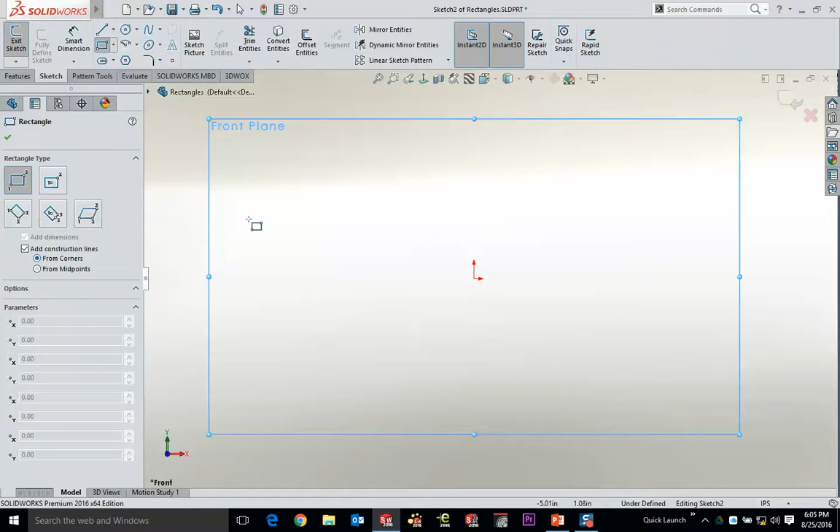Now, I don't have a lot of use for drawing these from the corners, because there's already an entity at that endpoint—these show you a nice center, but that's about all they give you. When you use them from the midpoints, it gives you the center point, but it also gives you something you can latch onto. There's a little center point you can grab and drag, move this thing around, and it's just an easier thing to deal with as a result of that functionality.

We'll start to show that a little bit later as we go, but no matter what type of rectangle you draw, you can use those functionalities. So even if it's more of a parallelogram or something on an odd angle, you can click and insert those, and it will add those particular pieces of construction geometry. Be aware that those are available with any type—by turning those off, you just get a basic rectangle in any orientation.

Now, the center points lost a little bit of their need with SolidWorks 2016, because you started to be able to actually grab midpoints directly. If I want to pick a midpoint, I can just pick on it. But I can't quite move it around the same way I was moving around an actual physical point that's there—picking on that doesn't allow me to drag it around that specifically.

The other types of tools I really like to talk about are things like slot tools. Slots were added a few releases back to really improve the productivity of creating what is essentially two lines and two arcs—either parallel lines and tangent arcs, or a radial type, an arced slot. That's now a couple of concentric arcs capped off by a couple of tangent circles, or arcs.

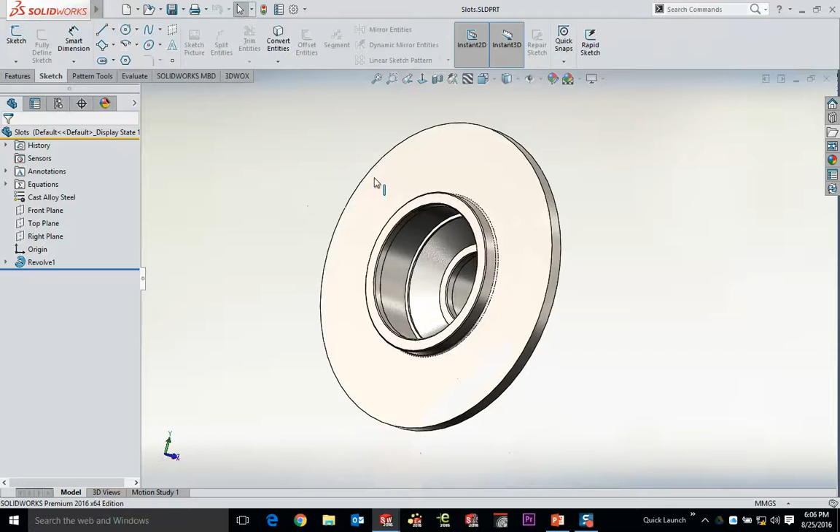This is a really simple tool to be able to utilize. When you go ahead and select on a face and start a sketch, there's nothing mystical to that.

By grabbing on either of these slot tools, you can do either straight or arced types of slots. It's either a center point to center point start, or a midpoint of the slot to a center point, which is the one I'll do for starters here.

When we're looking at a slot like this, if you start at the midpoint and then go off to the side, you can snap this horizontal and vertical. Once you click that into place and pull, that creates the rest of the slot for you. It's a simple thing to do, and it will auto dimension if you have the add dimension check mark turned on over here.

By doing this, you can also choose to have dimensions either go from center to center or to the maximums, the tangencies that are there. This is a retroactive thing. If I set it to be the maximums and draw another one over here, that's the setting I currently have turned on, so you'll see that come into play on this initial creation. But even if I exit this tool and select that slot, I have the ability to retroactively change that dimension. It's a nifty way to do each of those.

The arc slots, though, are just as cool. It's either a 3-point arc or a center point arc, so like you're drawing a circle or a 3-point arc, only you get the benefit of the slot after the fact.

By starting with the center point arc, I'll just start at the middle, begin by clicking the first point of the arc, second point of the arc, and then from there you're just pulling out and getting this really beautiful slot that gets created there. This gives us an angle dimension, a width dimension, and then in this case the radius itself.

When I go ahead and take these and extrude them as a cut, I don't really care how far they go, so we'll just pull them all the way through. You end up getting additional geometry that you didn't get when you drew two lines and two arcs tangent to each other.

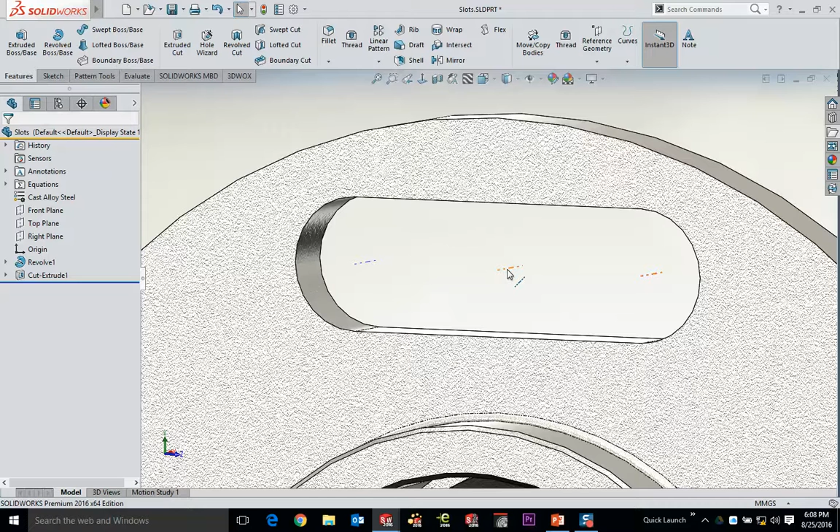If you go ahead and show these things called a temporary axis, what you'd get here is actually a temporary axis in the center of both circles, but also one right in the center of the arc. The key to that was, before we could do a slot mate, you had to have something to mate a pin or some fastener to in the middle of the arc, and that temporary axis really was the magic to that.

It even happens down here on the radius one. It's a very tiny looking temporary axis, but it is right in the middle of that slot, so that's a suitable thing to be able to mate things to.

The spline tools that I like to show, though, these are the ones that really allow us to create some very odd geometry. There's 2D reasons for this, and then 3D reasons for the spline, which are going to be more like wires and hoses and things like that.

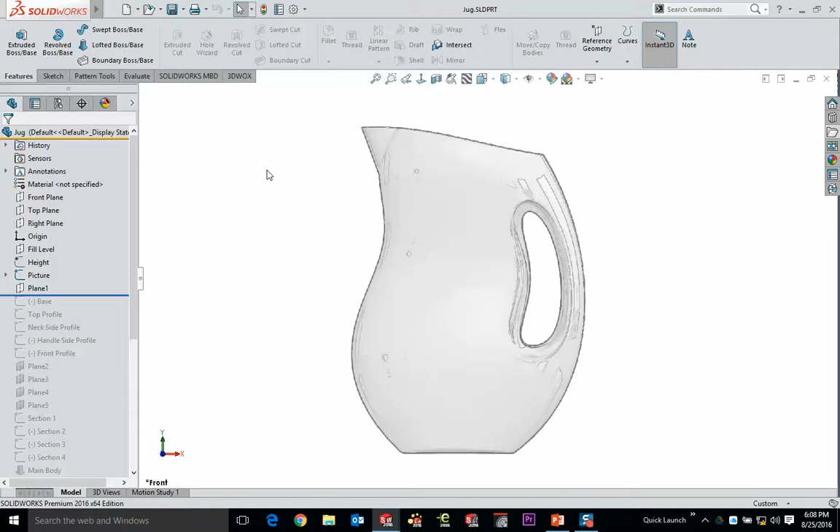When I'm drawing a spline, though, we've added recently a new spline type called a style spline, and that's really my favorite one here. Now this is an image that we've imported. I'm going to show you how to do that in just a second.

But when the image is of poor quality, I have to manually trace these edges. We do have an auto trace functionality, but on JPEGs you might as well give up on it because they have artifacts around the edge due to their nature. So typically what I'll do in this situation is just create a sketch.

With that sketch, I'll draw a spline. If I want to map an edge, like this really curvy edge in the front here, you can use the traditional spline, but I've gone away from that since SOLIDWORKS 2014. This regular spline is a bunch of points that you'd click, and then the spline itself would interpolate through each of those. The quality of this spline, though, is not very good.

It's more like an Adobe Illustrator spline, for anybody who's done vector graphics in that respect, where you have all these points that you can then change the weighting through, as well as the angle of attack.

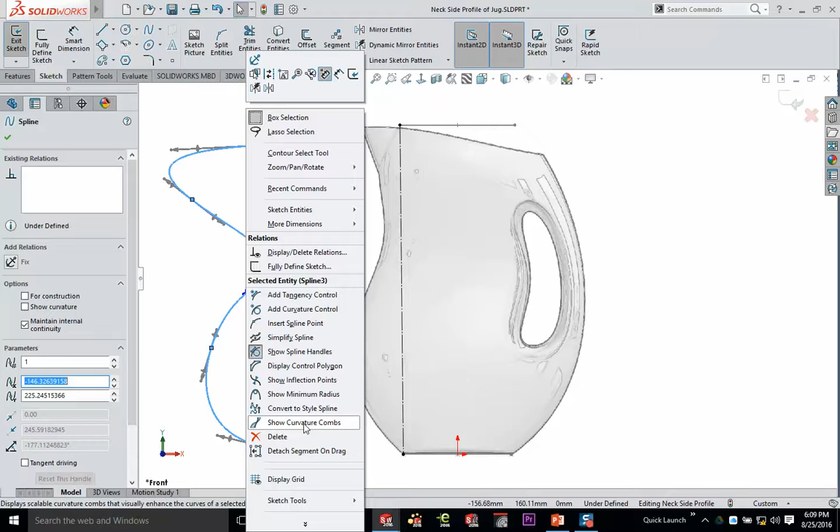It can be independent on both sides, and it can also have a really big detriment to the quality of the curve. When you right-click on any spline, you have an option to show curvature combs, which is an interrogation tool that shows you how a curve turns from convex to concave, and how quickly these inflections take place. When you get funky, drastic changes adjacent to each other, that's really bad for the quality of the curve.

So what we've added is something called the style spline, which from a user experience is a much easier thing to create. It's based on a bunch of construction lines, and the spline itself is weighted by the points that are on the construction line.

Also in 2016, we added the capability to make this a B-spline, which is a really smooth curve. No matter how sharp it turns, it keeps the curvature very consistent and smooth. You can look up on Wikipedia the difference between Bezier and B-spline, but essentially it's a higher order of curvature while still keeping it tremendously smooth.

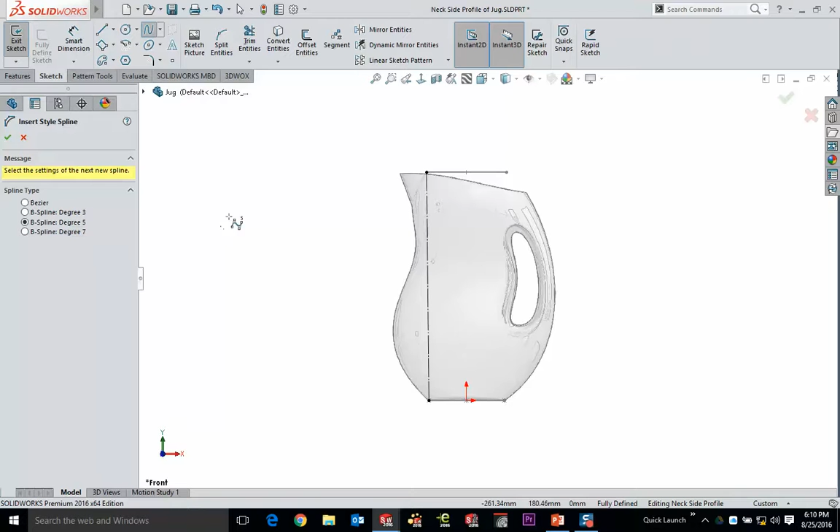So when I create something here using the style spline, what I end up with is a bunch of clicks that are basic linear inputs. As I'm clicking here, I'm drawing construction geometry, and we're getting a curve that follows what I'm doing. I have some capabilities to change this through pick and pull, but the curve itself is driven by where these points are, so it stays nice and consistent without sharp inflections from grabbing a point and twisting it in a weird direction.

It's just a matter of a little trial and error, which after doing this a bit doesn't take long, and you can easily map that curvature to something that looks really nice. When we right-click on that spline and show the curvature combs, we get combs that are very consistent side to side, changing from start to finish, but a pretty smooth mix throughout this feature. So that gives us some really nice geometry.

Now another little side benefit here - I didn't explain this up front, but as a little demo magic, what we had going on here is a surface that's actually a swept surface. Initially I had it created going between a spline and some non-existent geometry over here, because this sketch was actually just a center line. We have a function we added a while back that allows us to replace one entity with another.

So if I drew a garbage spline and used that for a sweep path, I could go in and edit that spline, draw another one that was completely clean, and swap one out for the other so that all downstream relationships would update to the new sketched entity, even though the old one was essentially replaced and deleted. It's called replace entity.

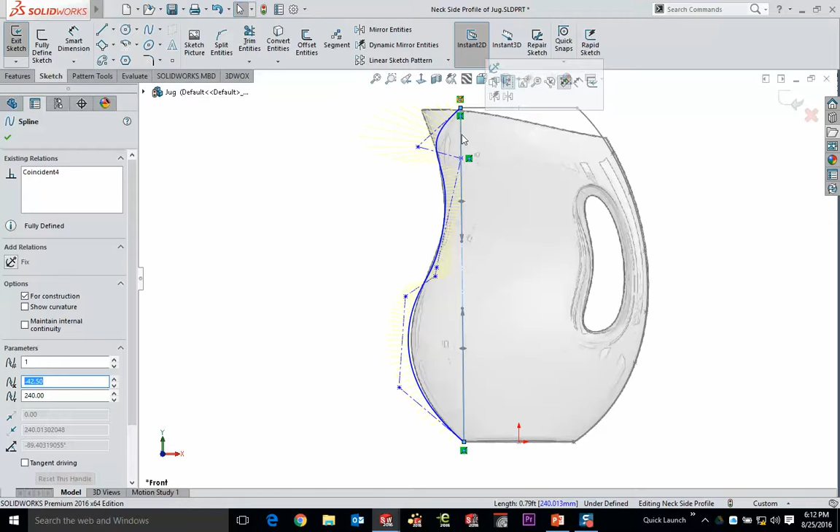So in the initial surface I've got here, this line was the left-hand rail of that surface. I'm going to swap it out for this spline I've just drawn, by selecting the line and using the Replace Entity button. So though that was the sketch profile in a sweep, I'm now going to replace it with this spline, and delete the original - which could also be left by making it construction - but I'm essentially replacing it with this new splined entity.

So when I do that, it now updates all downstream references to this new spline. As I start to rebuild and go through my tree, I'll get a full surface that updates to that new spline as opposed to the old line that was there.

A little hard to explain here, but we added that in 2014, because if you did those types of swap-outs, there were a lot of references and broken features downstream in the tree, looking for the old sketch entity that was deleted and replaced for a good enough purpose. But in this case, replace entity allows us to swap it out and everything updates fluidly after that.

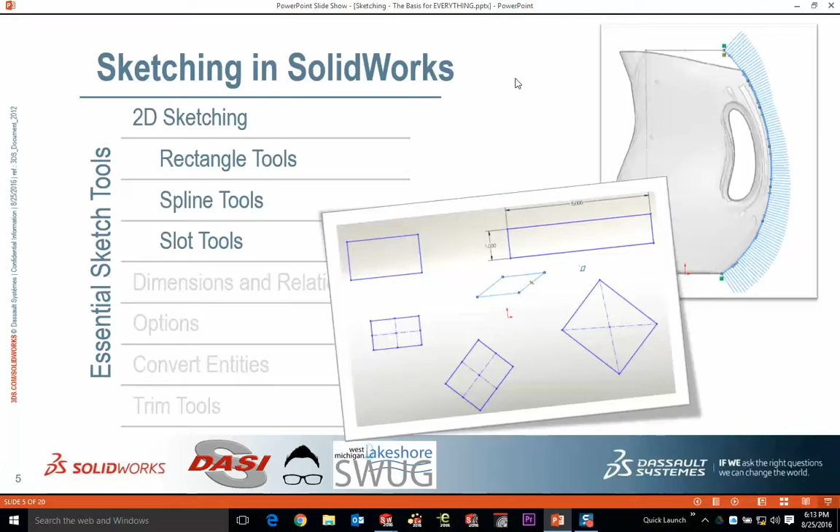All right, we'll start getting into some really cool stuff here shortly. So dimensions and relations is really how you can take your sketches - and this is the minutia.

You have to put dimensions on everything. You can work with underdefined geometry, of course, but proper practice would be to fully define your sketches so that the updates are predictable.

But what I want to do is show a couple of things with dimensioning—basic workflow, dimensioning the center lines, and even dimensioning to a couple of circles or individual circles on screen, and how those things behave. So let me start out first with this circle here.

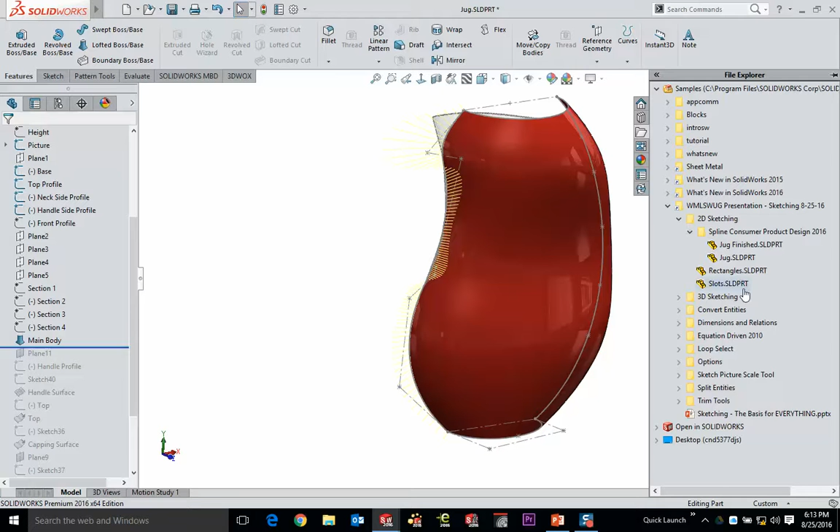Couple of things here that I want to show. All right, so I'm going to start off with this body right here. And what we've got is a sketch that's got a lot of blue underdefined geometry.

One of my favorite things to do whenever I set up a new computer with SolidWorks is add a hotkey, and that hotkey is Alt-S. When I click on Alt-S, that's my relationship hide and show.

If you don't use a hotkey for relationship hide and show, you're either fighting through this complicated looking sketch—because as you zoom and pan you've got all these relationship icons to deal with—or you're constantly going up to the hide show tools, and I don't even know which button it is up here since I never bother using it. Hide and show relations is going to be... good Lord, that's points. See, I don't even use that.

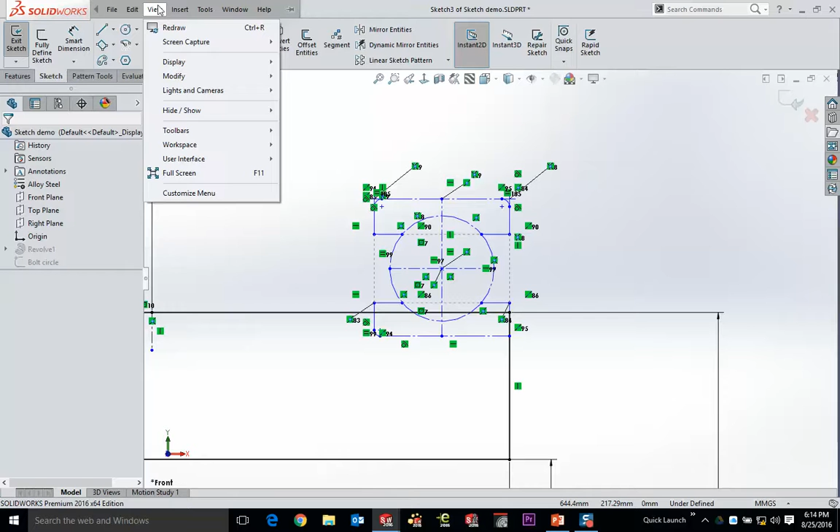Use the hotkey—so I'm showing them right now. Basically, if you go to your View pulldown menu, that's where you're going to get your hide/show modifier. Alt-S is what I use for that. It's quick enough to use because I like them, but only a very small amount of the time, because they do clutter your display. So Alt-S will get rid of that for just a second.

I want to show some of the things that were added a while ago that can kind of be swept under the rug if you're not looking at those.

It's Alt-S for me, but I created that hotkey. So what you want to do is go to Tools and Customize, hit the Keyboard tab, find Sketch Relations, and just assign Alt-S—or make it whatever you'd like.

If you have a 3D mouse, using one of the buttons on your 3D mouse is also effective if it's a constant function that you do.

I want to illustrate a couple of things that have happened somewhat recently here—this is 2014 stuff. But I'm going to delete some entities to do this. One of the things that happened was the ability to rapidly add relationships without an excessive amount of picks.

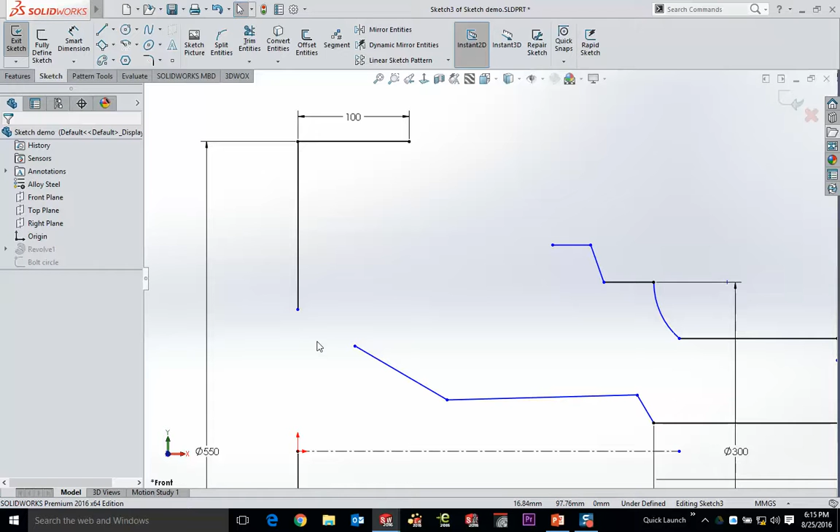I'm going to use a tangent arc right now to cover up this area where I just deleted a couple of lines. When you draw a tangent arc off the end of a line, it's going to be tangent from that point. Now this is gesture based, so if I pull this to the left or to the right, of course that tangency will work.

But if I go back to that endpoint and pull it out this direction, it's still technically a tangency, but it's a tangency perpendicular to that vertex. Or if I go back and push it back this direction, you see the tangency go that way. This is all just how I'm moving my mouse to get this to happen.

Of course, the second end of this is all predicated on where the other entity sits. So as you end a sketch at a point, what you're now served up with is immediate relationships—this is what's possible between what I just drew and what I drew it to. And when I click on tangent, it simply goes right to it.

Now, when I draw a line, it's the same kind of thing. If I draw a line from the middle of space to the endpoint of an existing line, that's going to give me the properties for that line, but also properties like perpendicular and parallel for the entity I drew to. So I can immediately go to perpendicular on something like that.

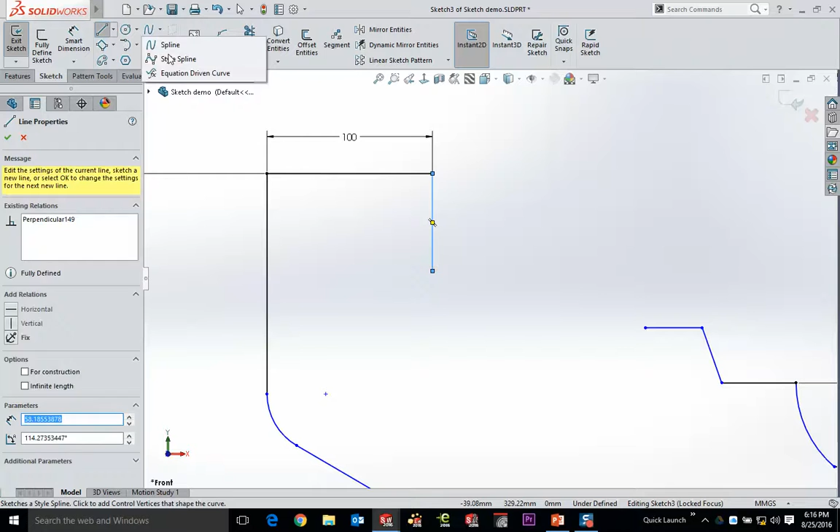Now it even works for splines—this type of stuff is pretty typical. So if I draw it from here to here and then end the spline down here at the line, same kind of thing. Only splines don't give you just tangency, they also give you curvature continuity. So I could do this as a Class A blend between those entities, and that's going to work out nicely there as well.

Now this works even retroactively. So things that are already drawn, like right there where we don't have a perpendicularity, if I pick the endpoint between the two, we get the relationships appropriate for those two entities. You used to have to pick both lines to get this to happen. Now you just pick where they touch. Down here it's the same thing. You pick that point and I can choose tangency between the pre-existing line and arc, and it adds those relationships easily. That's something that's been around for a little while.

Dimensioning also walks you through the process depending on how you dimension. A while back, probably 10 years now, when you dimension to a center line in a sketch having a construction line like a center line, there's this thought that it's most likely going to be an axis of revolution. It's not always, but most likely that's the case. So when you dimension from any entity to a center line, we've always had this behavior where we'll give you the linear dimension, but instead of placing that text, if I move my cursor below that center line, it automatically doubles that dimension so that value is proper once you make the 3D solid.

We did this because in design tables, people would have to deal with a half-size dimension for a full-size part if they're trying to automatically update a dimension on a part with a table. And we don't like that visual. So full-size dimension is important.

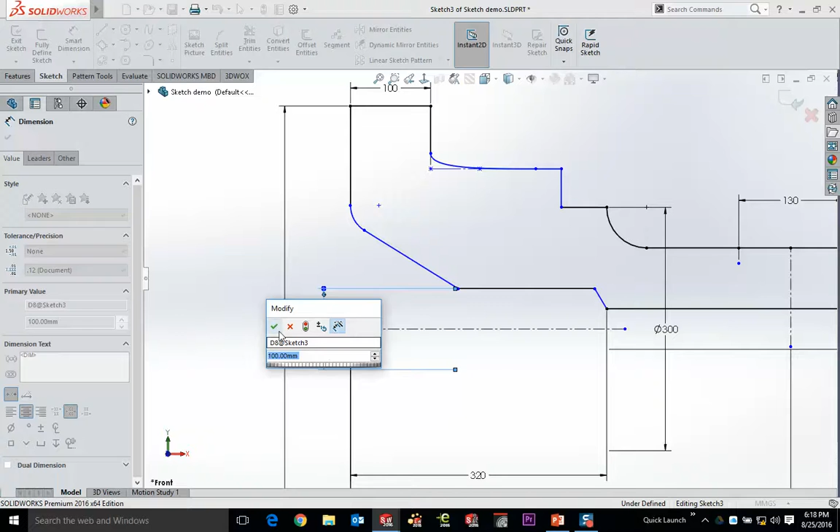Now once I add this first dimension as a diameter, my cursor makes it a persistent function. There's a little center line with a D next to it, and that essentially means that center line is now an understood selection. So even if I was up here where I couldn't even see the center line, I could dimension to another entity like a line, and it would automatically pick that center line and give me the double value, as you can see as I zoom out. It's going to keep that going until I decide that's no longer the case.

So I can do it here again, put another dimension in. Everything else I have is pretty much fully defined unless I go to a point. So let me just go ahead and click to a point, and you can see that happen there as well.

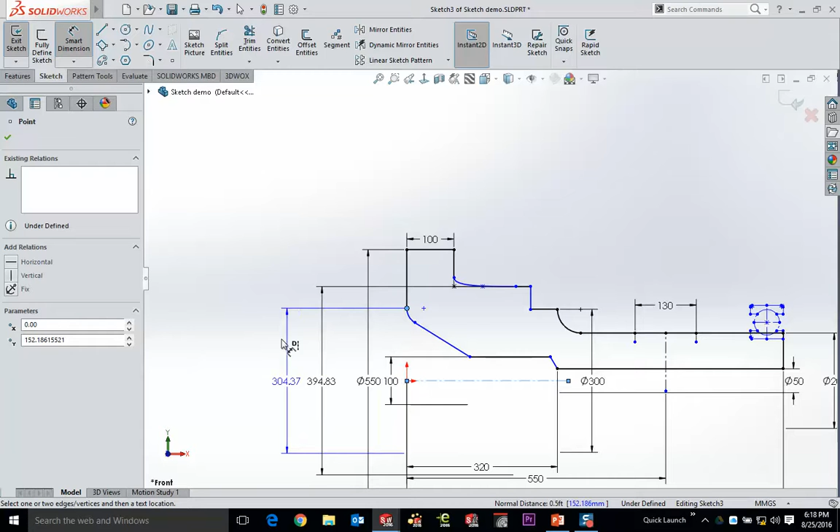Now the beauty of this is that it helps you until you don't need it anymore. So if I really don't want to deal with that, maybe I come in here and select this line, which will give me a double dimension. If I immediately go to something else, like maybe this point, what I'm going to get now is a dimension that just goes between those entities. So it will persistently pick the center line until you choose to pick something else, and then it'll let go of the center line and go discretely to what you've selected. It's got a neat behavior that way.

We added, with this release, the ability to do that also on an angled line. So if I now pick on a line that's on an angle, I've gone past that function, so I'm back to regular dimensioning. If I now go ahead and pick a center line here, we don't quite get that same doubling behavior. The problem is that when lines are parallel to each other, they never converge. But when lines are on an angle, there's no one side or the other - they will eventually cross, and then it will flip directions. Sorry about the hand puppets, the video's not going to get that.

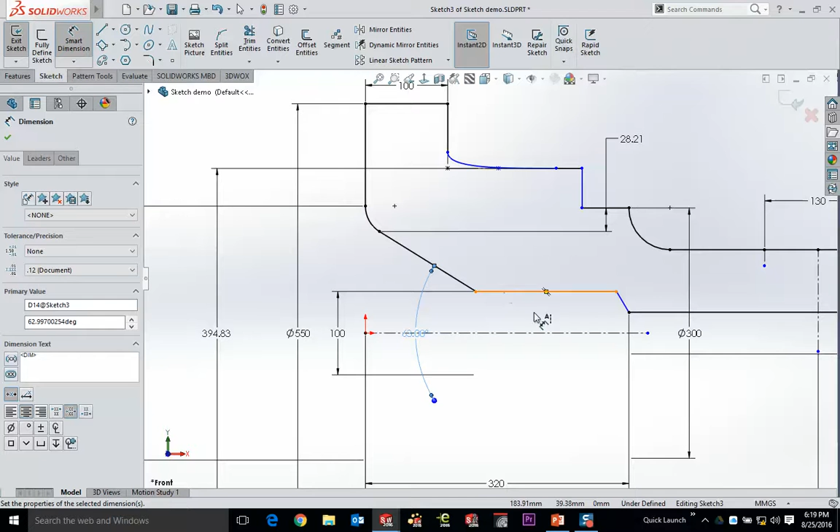However, if you want to double this dimension, you hold the shift key, and that will double that value. So it'll work on an angle and give you the full value, but the shift key is required to make that happen. Now if I click that and put that in, I get that same cursor behavior, only it shows an A next to it because we're talking an angle, not a diameter. So here, if I pick on another line on an angle, it's going to persistently select that center line. We still need the shift to give us that doubling value, though. It's just a quick way to get those dimensions in place and selected and located properly.

So keep an eye on that. If I pick something else, right now, again, it's showing on an angle. If I pick on anything, it's going to give me a 90-degree angle.

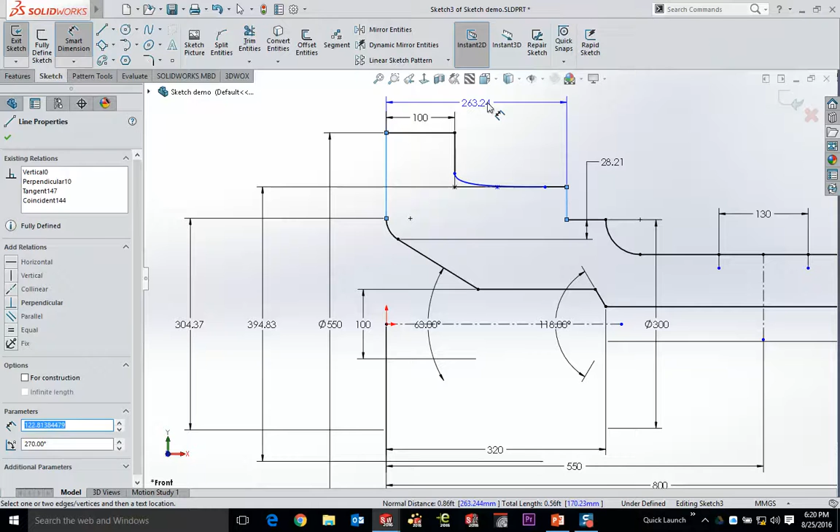If I just want to pick on something else, it will let go of that center line and then default to what I've actually selected. So that's the way those things function.

Now, I like to bring up one here quite often. It's one of my favorite things to show, and that is dimensioning to a circle. Circles are one of those things where when you dimension to a circle, you want to pick the circle. A lot of people come from 2D AutoCAD and like to pick points. In fact, when you draw a dimension on a line, you have to dimension from end point to end point, which I always thought was ridiculous. Just pick the line and let the software pick the end points. But when it comes to circles, circles have a whole different behavior.

If I start picking center point to center point, what I'm getting is actual center point to center point values, and as far as the software is concerned, that's just a line, just points. What happens is you look at the properties for this dimension and you really just have basic linear dimension properties. I'm going to show you what I'm talking about with this other tab in a second. When you dimension instead to a circle, let me delete that dimension and go from one circle to another,

it's always going to default to the center point of that circle. It's always how we've done it. However, what you get when you dimension from a circle to a circle is under the other tab, the leaders tab, down at the bottom, you get this thing called arc condition. By picking on the circle, you can now go from center to center, defaulting to maybe the minimums to each other, or the minimum to the maximum on another. It's a tangency thing that takes place. Unless you dimension to a circle, you don't get circle or arc conditions. So it just makes sense there.

Now with something like this, you can actually do that with the dimension when you're applying the dimension itself. I've drawn these two pieces of construction geometry because this basically happens within a 90-degree window, 45 degrees on both sides of the center line to center line of this part.

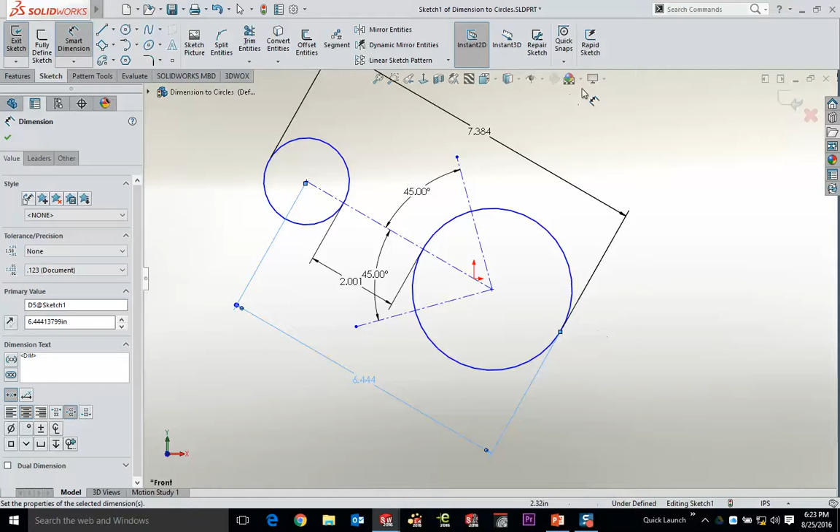But it's this magic little window that happens, 90 degrees here, then 90 degrees here, then 90 degrees on the back side, and you'll get those different nuances. So that one there I think is worth showing any chance that I get to. So any questions so far, guys?

All right, got to keep you awake. When you have pulled pork like that, you tend to doze off very quickly, and I didn't eat, so that's why I'm going to keep going here.

There's a couple of options that I like to deal with on sketching, and these are going to be global system options, not document specific. So it will be the way your system works every single time we do this. Let me jump right into each of these.

When you go to Tools and Options, or the little gear icon at the top, there's a specific group of settings just for 2D sketching. When I pull this up, there are default settings and then there are my favorite settings. Unless you're using an options file, I like to set these discreetly because I like to see if they've changed. But there's a couple I like to show people just for your own sake.

Solid Edge users, you're used to pick a face, start a sketch, and it will roll normal to you. That's this first setting right here. We haven't had it for very long, maybe 4 years. It's called Auto Rotate View Normal to Sketch Plane when a sketch is created. When you turn something like that on, no matter what orientation you're looking at something—

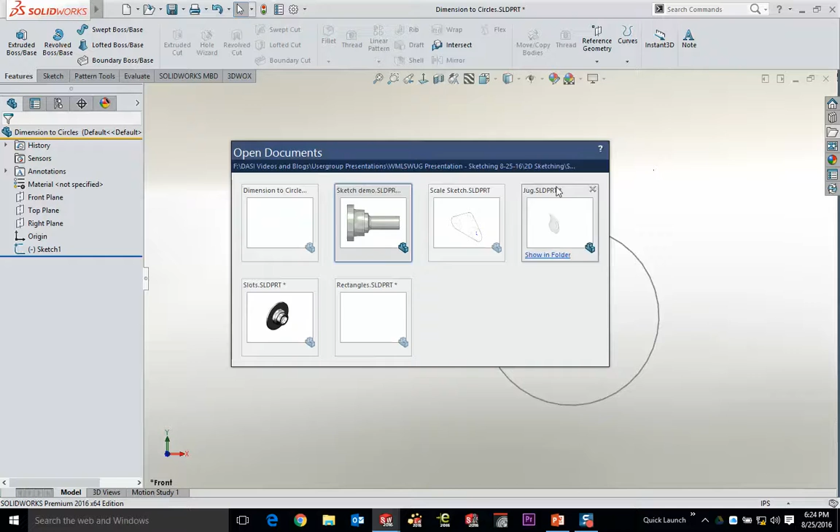Let's take this part for example. If I pick this face and start a new sketch, boom, it comes right to my orientation. Then I draw a circle, and hit extrude. Now it will jump back to the orientation I started in, and then I can do whatever I want. So if you like to work in plan view, it will go between 3D to plan view and then back to your 3D view when you're ready to do the 3D operation. But it's all based on that one setting.

Tools and Options, Document Properties, Tools, Options, System Options, and then down to Sketch. It's the first one: Auto Rotate View Normal to Sketch Plane on Sketch Creation.

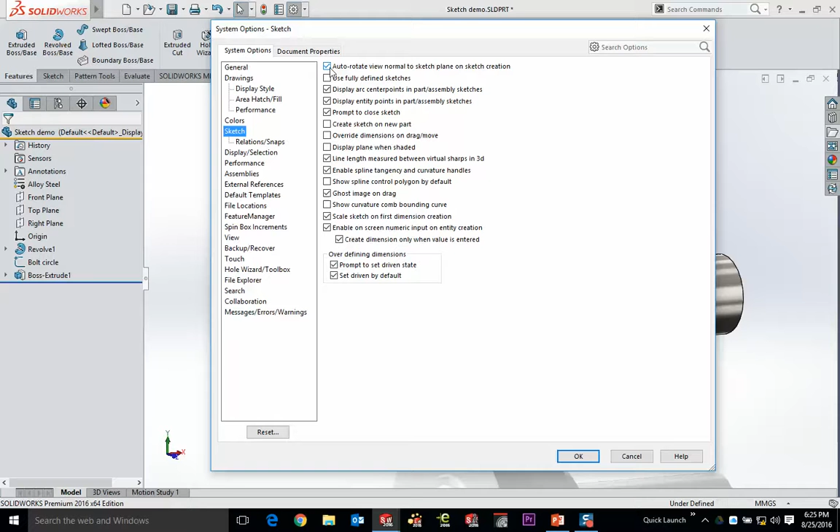Think about that—I wish it had... that's good, what you just did there. When you go back and edit your profile, does it come back up? No, it doesn't. So it's not upon edit.

So here we are looking at this one. If I pick it now and say Edit Sketch, it does not come back up—it's only on sketch creation. I think that's the terminology that was picked very specifically. Sometimes when you have limitations, as long as you describe it, you set the expectations. But that's not a bad idea.

I would like maybe a sub option that says also do this when you edit. Not a bad idea. I don't have a notepad here, otherwise I'd take note of that. I'll try and put one of those in. Enhancement requests are the lifeblood of the software, by the way, and it's little comments like that that get that stuff put into the software. So those are good things to know.

Down here is another one that I get a lot of reaction to, and that's Enable On-Screen Numeric Input on Entity Creation. This has been around for a while, but the one beneath it really is the one that made this usable, called Create a Dimension Only When a Value is Entered. Typically they are turned off by default. So if you go ahead and turn this on, I'm going to show you first the behavior of Enable On-Screen Numeric Input on Entity Creation.

That's how I'm going to set this. I'm going to pull up a different part here, just so I'm keeping things consistent with what I've prepared—not that bearing. What do I want to do on that one? There's another file I want to use for that, but I can go ahead and use any one of these different individual ones, no big deal.

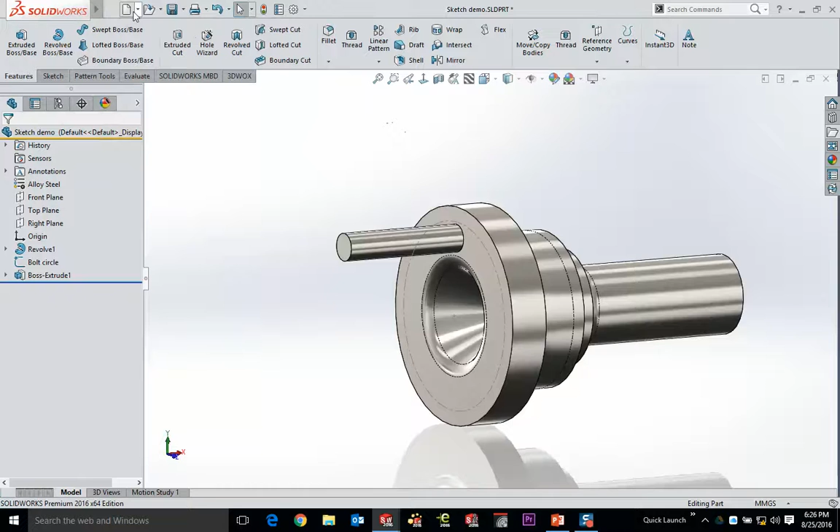When you draw something, we want to avoid the dance of drawing your sketch, then dimensioning your sketch, and make it a bit more of a quicker process by allowing you to add dimensions while you sketch. The setting I have turned on is Add Dimension. When you draw a line, you'll also see over here on the side some add dimension operations. Now with those turned on, as I draw this line, you'll see my preview—as I click, it's adding dimensions, every single time I put that in.

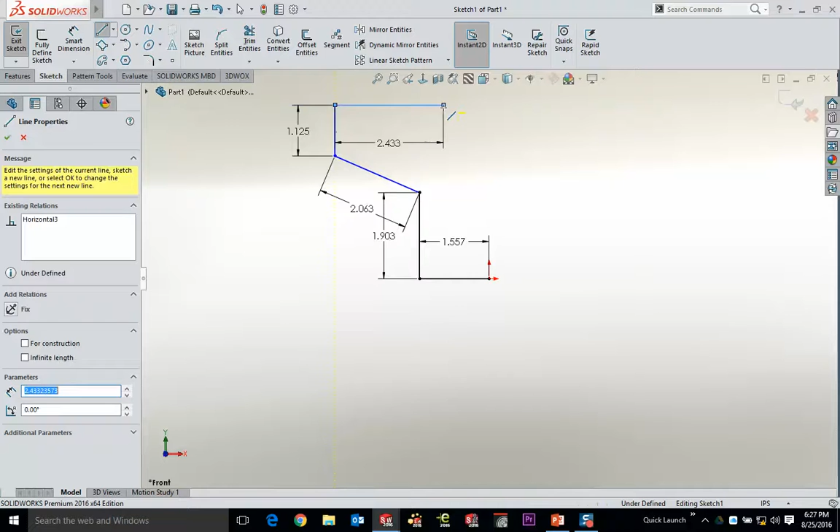Now this was the initial creation of this tool—I think it was around 2012.

What we found out is that people spent more time deleting the dimensions they didn't want than getting the benefit of the added dimensions automatically. So that's where things really got ugly with this one.

Now the next setting is what made this palatable. Again, go to Tools and Options, System Options, down to Sketch. That's Enable On-Screen Numeric Input for Entity Creation, but also Create a Dimension only when a value is entered. So this is what this looks like.

When I'm drawing a line now, I'm doing the click, click, click method. The AutoCAD method is how I refer to this, because Windows is more pick and drag, so pick, drag, release. I'm just going to click and release and move my mouse.

Now what happens here is you see a preview. If I type in a number now, it's going to add that value and continue sketching. I can type in another one here. Let's make that one 3, and then I'm going to continue in this direction.

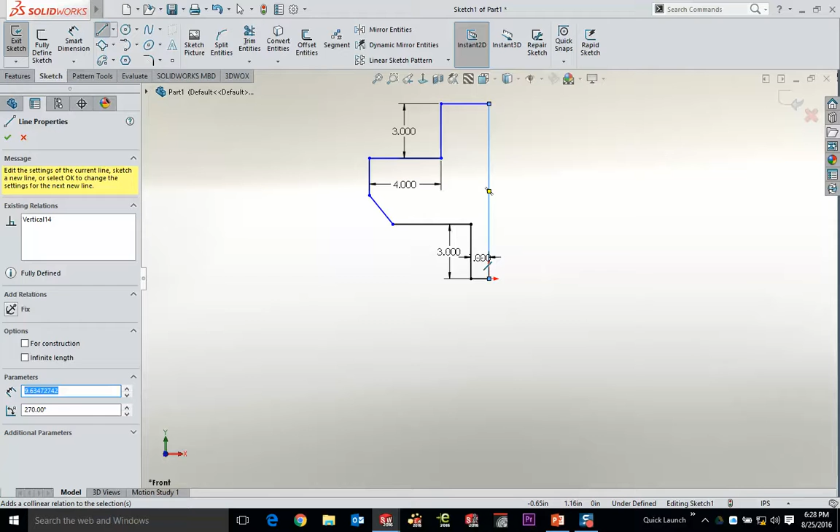Now if I click and don't add a dimension, it doesn't add one. So maybe you don't know a couple of these dimensions, and that's okay. But when you do know a dimension, go ahead and add it, and it will add that value for you. So maybe you know some of these, maybe you don't. It gives you the flexibility to type in a number when you know it, and not type in a number when you don't.

Now, one of the reasons I'd show something like this is especially when I draw circles. Circles are the ones that make this the most pleasant. If I want to draw this bolt hole circle that you're seeing over here, I'm going to draw that bolt hole circle.

What I'm going to do is pick the face, start the sketch - I did turn that setting on - and take my circle tool, and without doing a pick and drag, I'm just going to click and move my cursor. You see the preview, I'm about 375 millimeters on this one. If I type 400 right now, it will add the dimension, fully define the sketch entity because I put the center point on the origin, and now I'm on my way to moving on to something else.

Instead of deselecting the circle tool, picking the dimension tool, adding the dimension, and moving on - every sketch operation could be 4 button picks less, which is thousands of dimensions a week if you look at it. So just draw things in like that. If you pick and drag, or pick, and you don't add a dimension, you don't get it.

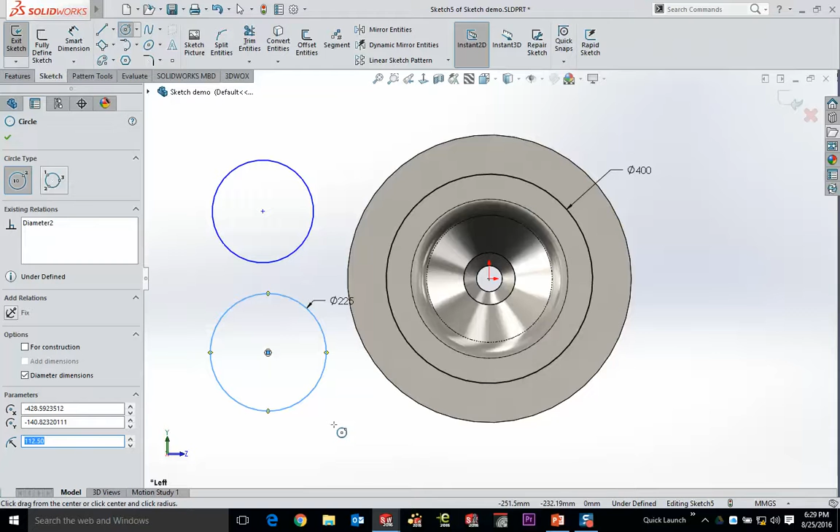But if you do add a dimension, even while I'm picking and dragging, if I type 225 with my other hand, it will add that dimension for me as I'm typing. So it only adds a value when you physically enter a dimension. It's a nifty way to get there a little bit quicker.

Let's see where we're at on that one. Some of the other ones there, I just kind of leave as default. But those two were really the ones I thought were the most important to at least demystify.

One that we added, though, and this is one I just accept as automatic, but we'll talk about it right here - under this Tools and Options, Sketch system option, it's this one called Scale Sketch on First Dimension Creation. Everybody know this one? We added this and I just accepted it as this is the way it's always going to be. So frankly, I just noticed that was an option, but I don't see a reason to turn it off.

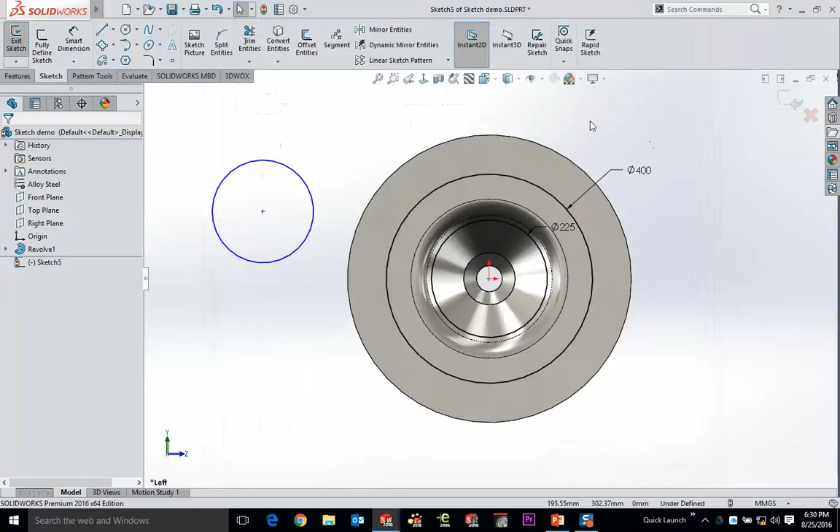But it's one of my favorite things, because when you're drawing something, you don't have to be conscious of the size you're drawing it at - you just have to worry about shape. So as I'm drawing something, whenever I get into it, I'm going to make a feature of a particular size, but right now I'm going to be very fluid as to how I generate something. Draw it, I don't care how big it is. I just want to make sure these things are of a relative size to each other, right? So those are the kind of things you end up dealing with.

Oh, my auto dimension is going to screw me on this one, by the way - that's what we were talking about just a while ago, James. Sorry, I keep calling you John. Instant 2D, when you tap that dimension, is when it goes ahead and changes the value.

If you can double click it without moving, see, I have trouble doing it. Then you can get the modify box to pop up. That's the resolution on that is way too touchy. It is way too touchy. So yeah, we're trying to work on that one.

What I was trying to do though was actually not have any dimensions applied to this, because that's probably going to screw up what I'm about to do. But you want to make sure that you just draw the shape relative to what you're working on.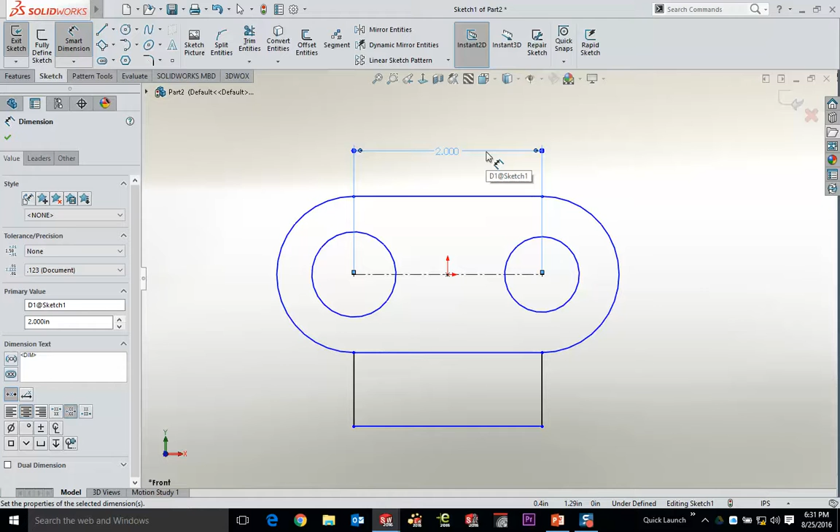As we go ahead and add this first dimension to it, what we see here is that I'm at 10 point whatever inches. If I want that to be 2 inches, once I go ahead and type that 2, the whole sketch gets smaller as a result of that, not just the one-dimensioned entity, which is how it would have been before.

And if you're thinking about that, when that happens and it's a drastic difference in number, the whole sketch can flip. Arc tangencies can flip. It really gets trippy when you look at those. So by drawing it this way, I drew it 5 times the size, but that first dimension took it all and proportionally scaled it up or down.

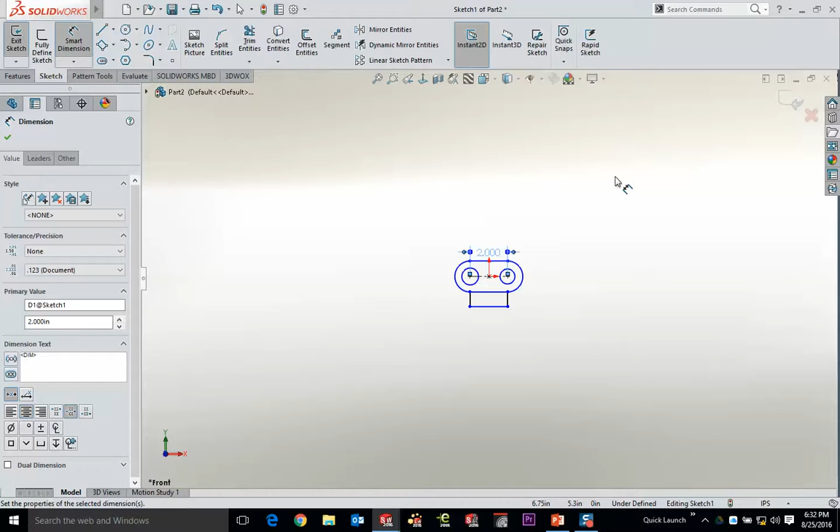I think even if I do a zoom to fit, in some cases it will zoom to fit as if it was the previous value before we rebuild this sketch. So that first dimension is an important piece of that whole puzzle there.

So that last option I was looking at is scale dimension. This is on by default, so you won't have to change this if it's not something that you've already turned off. Doesn't that only work the very first time? Only the first dimension.

So in other words, if you do that and you say, oh, I got this wrong, you erase it out and do it again, it doesn't work. It worked on what I just did, which it auto-dimensioned this slot, and then I deleted those dimensions and then drew them back in. So it seems to be now the first dimension that's on the sketch, not necessarily the first one added. So if you delete all the dimensions and redo it, it looked like it worked.

Although, I'm going to try something here because now I want to make sure that that is actually the case. What if I took this guy and, oops, we hit all the dimensions. Didn't want to do that. I was thinking of deleting all these dimensions and then redrawing one of these values. So this might take longer than I want to. I'm going to try this one offline.

I think that's going to work now, if you delete all those dimensions and then add a new dimension. The whole thing will rescale, but I'm not 100% certain of that. I'll come back and try that afterwards.

Convert entities is by far one of my favorite, you can come in Andrew, one of my favorite sketch entities. Convert entities is a super powerful tool. Allows you to duplicate edges, automatically link them, and then move on with a really super powerful thing.

What it's always had a flaw with, though, is the way you select internal loops. And that's something that 2016 added some new stuff to. So I want to show you a little bit about that, as well as just the basic nuances for those of you who may not know what convert entities actually does.

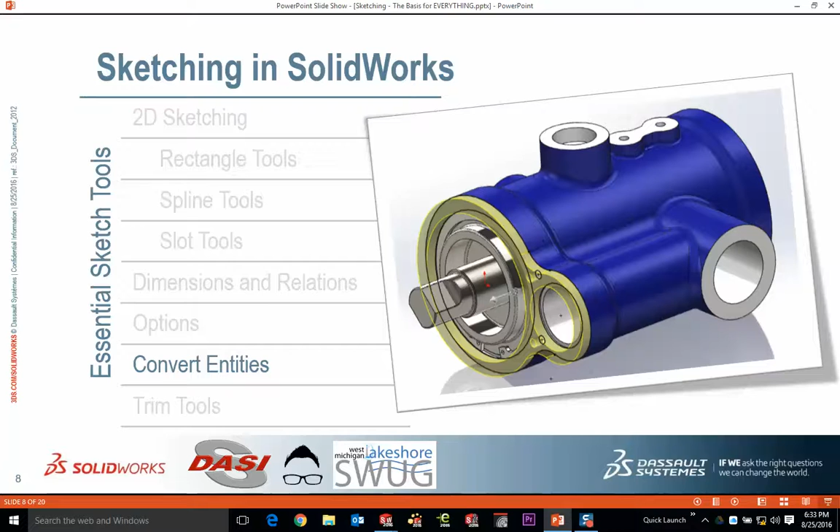So I'm going to open up this file first of all. Let's grab this big guy. There's two that I'm going to do on this one. One of them is going to be out of slide order, but maybe I'll come back to this file when I'm actually ready to do that.

Convert entities is one of these tools that allows you to duplicate edges. So here in an assembly, what I'm going to do is create a gasket that's the same shape as the face of a pump housing that's here. So I've got a part that's already started. For effect here, I'm just editing a part that's currently blank. But I'm going to start a new sketch on the face of this existing part.

Again, that'll rotate me perpendicular to that. When you pick a face and you hit Convert Entities, the flaw in this tool is always that it's always picked the outside edges. So even in this case, what I got was a sketch, and even if I show this as wireframe, it's not really going to give us a good effect. But it shows just the outside edges. Internal loops were never taken into account.

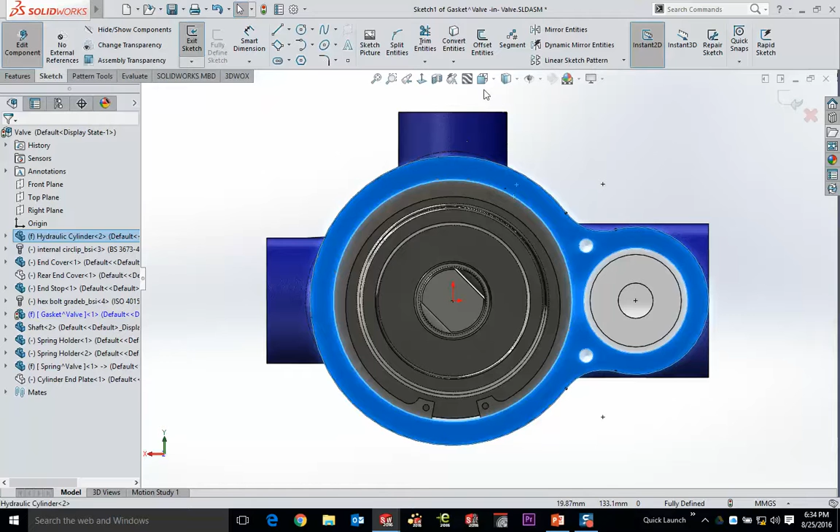Now the trick on this one, and I'll talk more about loop select in a couple more topics. If you pick the face and then control-select any edge of the inside loop, that under a Convert Entities would convert that internal edge. This one's giving me a duplicate error, but that's okay. Now that's a way to force it to the inside.

The problem is multiple internal loops, which we have 4 of here. Not quite as bad as what could be, but in this case it's just multiple for the sake of showing multiple. The key to getting this tool to work this way is to press Convert Entities first. Bring up a little bit of user interface for this.

What happens now is that as you select the face, you'll see the face selection, which will then default to the outside profile of that face. But this button here called Select All Inner Loops is the magic to this one. Now that means 4 or 40, it doesn't matter. When you click it, it's going to go ahead and give us those 4 internal looped edges. So there are the circles as opposed to just the outside.

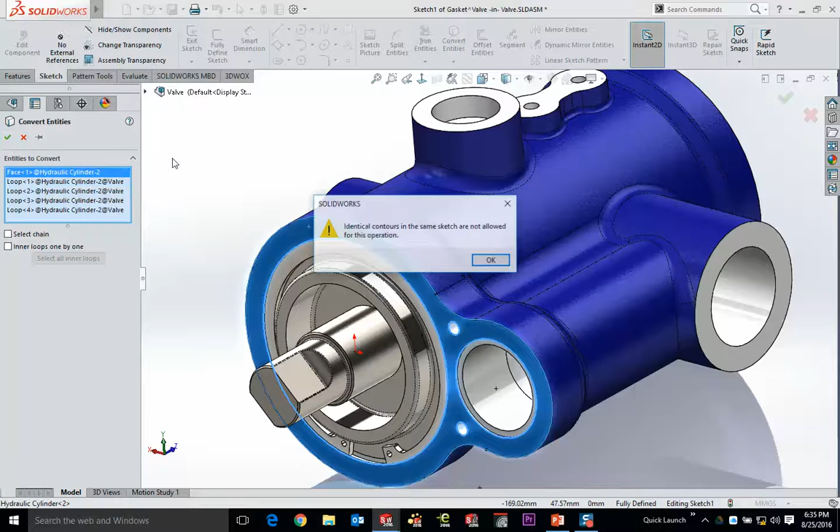But what that gives us now is all the nested loops. So now when I extrude this, I've got both internal and external loops. Let's grab that contour, there we go. And that's what we end up with. So it allows us to create those relationships, the on-edge relationship, and then it also allows us to very easily go ahead and grab the internal and external profiles.

What this does, for those of you who don't know what Convert Entities will do, is if somebody makes a change to this pump and that face changes, this part will change right along with it. I'll talk more about that in a minute with loop select because I've got an even better example of that interpart relationship going on there. Convert Entities is one of those things, though, that I like to show you exactly what's happening with this. Not everybody knows exactly what's taking place here.

So let me just really quickly make some construction geometry. I've got a couple of planes in space to which I'm going to make an axis between those planes. We will take that axis and one of those planes, and let's go ahead and just make a plane at an angle, because I like to show this with a plane that's sitting in there at a different direction.

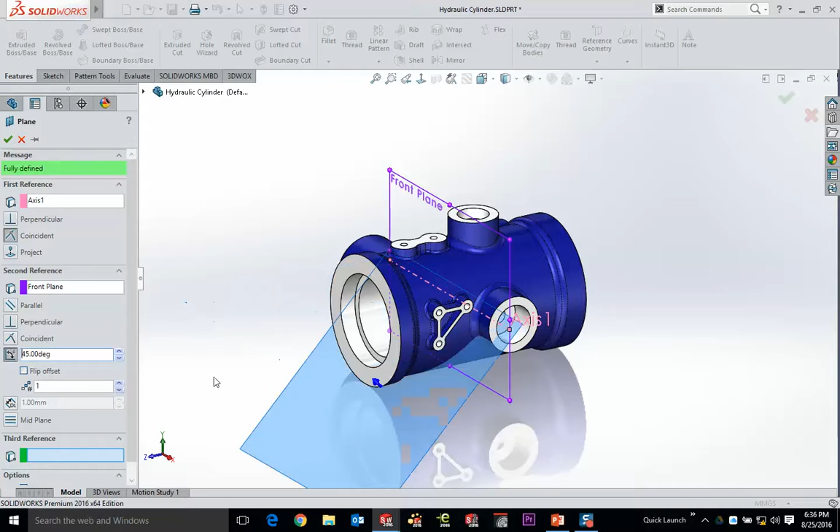45 is plenty. Convert Entities is really just projecting things for us. So what I've got here is a plane, and this particular plane is on an angle. So we'll go ahead and throw this one up there. And I'm just going to pick this plane and start a sketch on it, because the way we have this set is it's going to move perpendicular to that location.

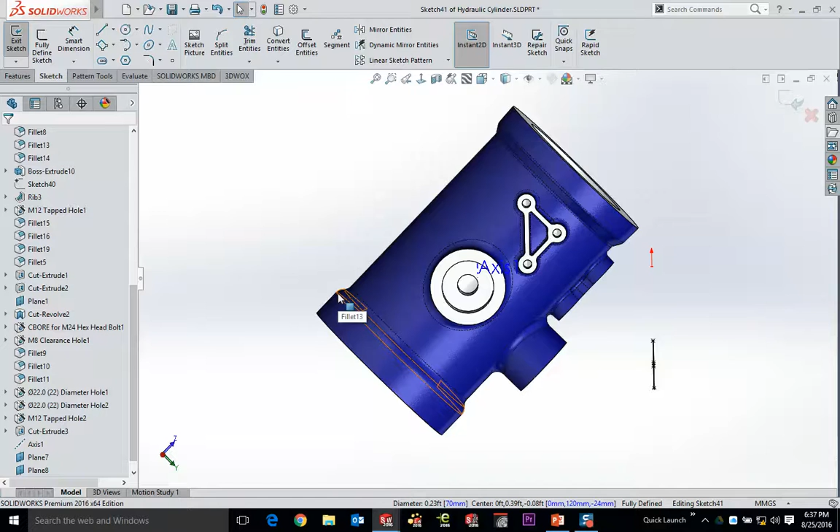If I grab an edge, say a circular edge like this, and hit Convert Entities, what it's doing is projecting that edge over to the sketch plane we're working on. So when it's the same face, easily that's going to be the same geometry. But when you're looking at it at an angle, that's where the convert is just going to take what it sees from the sketch plane and converts it to the part.

It's not taking this edge here and converting it to the sketch plane down here. It's taking a 90-degree, or perpendicular, look at the sketch plane and what that edge appears to be as you're looking normal to the sketch plane itself. So any one of these really odd edges that we're grabbing and converting create crazy looking geometry, but it's because of the way they appear from that orientation. Okay, so that's the important part about that.

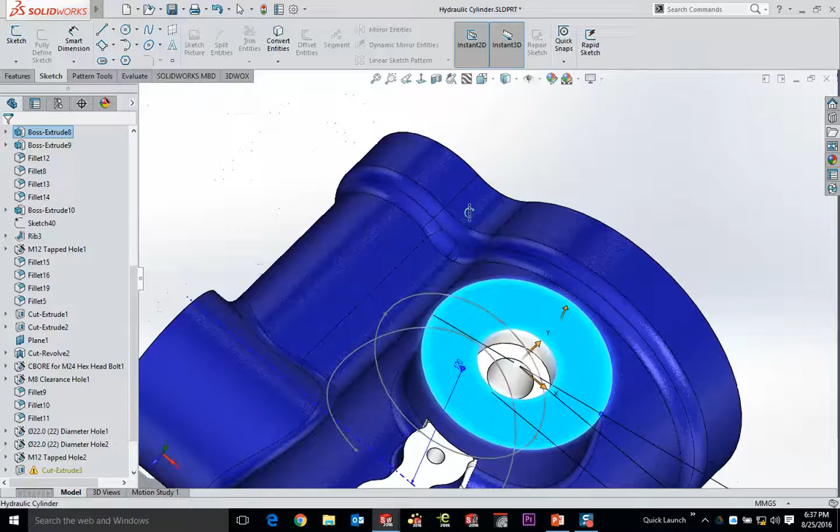Interfeature relationships are created, and if anybody ever goes back and edits the sketch, which creates a dimensional change here, which I'm going to use Instant 3D to modify, when we start to take that and make it larger or smaller, you can see that my sketch that's converted is moving right along with it. So that's the idea behind Convert Entities, is making sure that those features are cross-related to each other. Editing one edits both of them. But it's an easy way to make that happen.

That's an ugly looking example, but we'll go with it. The trim tools are something that are less and less necessary because of something we have called contour select. That's a little competitive thing that we did borrow from Autodesk Inventor, but they don't even do it very well. We borrowed it from them and made it better. So whatever, sorry, got to say that. It's pretty clunky over there. But the trim tools allow you to make a nice closed profile.

So when you're copying data from another feature, another part, 2D drawings, legacy stuff, it's easy to go ahead and clean them up to these nice closed profiles. So in SolidWorks, I'm going to close a few of these boxes. Keep an eye on my time here.

With the trim tools I want to show you on this one, just in case time got out of hand, I have a whole bunch here with sketches already there. What I have here is a very simple sketch—a couple of rectangles and a circle, with a lot of overlapping or intersecting contours.

The trim tool itself has a bunch of different settings—trimming to corners, things that are inside or outside of other clicked entities, and this thing called trim closest. But frankly, power trim is all you need to know.

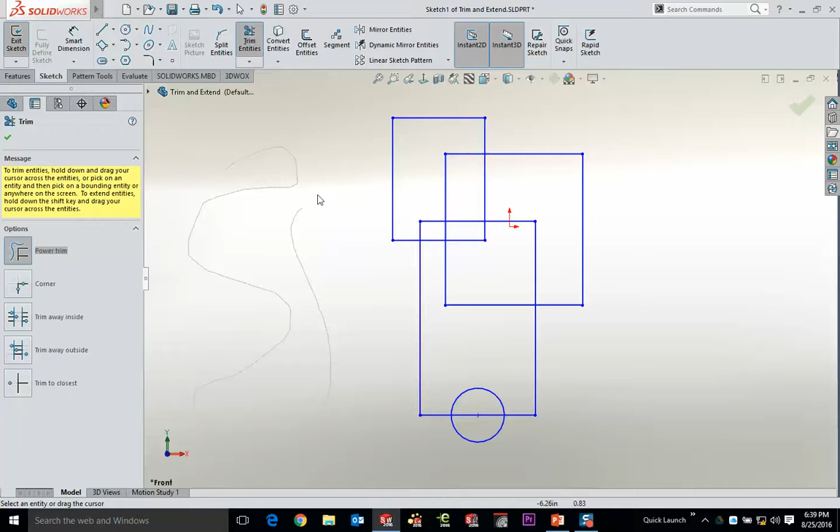When you're power trimming, pick and drag with your cursor and you'll see this trail that follows your cursor. When I let go, the trail stops. When I'm clicking and dragging, that trail is there, and whatever you pass across will trim.

Now, it's a cool thing because it's not just a single trim off. There are doubles, there are internal types of trims. When I used CAD Key back at Western, which is now eons ago, we had to choose between 7 different trim options to trim off something, whether it was back to the closest or between two things or click, click, click. It was really clunky.

Good timing for the vacuuming.

So what we're going to do on this one is just pick and drag. You see that as I drag it around and hover over something, it trims off that piece to whatever intersections are nearby. So here's a couple of single intersections.

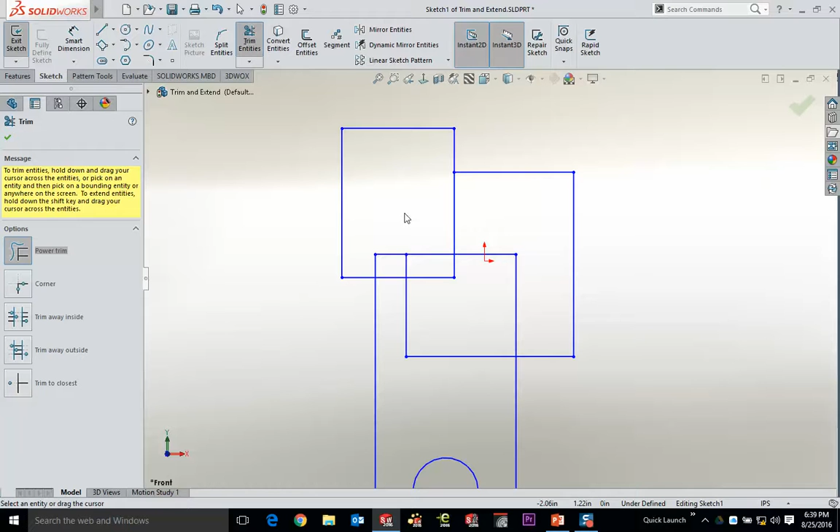When you have a double, what it will do is the double intersection. So basically I'm just wiping across all of these. I usually go very quickly—I just start taking things and trimming off all the stuff I don't need just by wiping across them. It's pretty easy to get all that internal stuff.

Now by turning on my relations, one of the other things I want to show you here—and this is one of the reasons Inventor does this very poorly—is that when we go ahead and trim off a circle, that goes back to duplicate intersections. And then I trim off this line. Look what happened to the line at the bottom.

The line gets segmented, but when I'm done trimming, in the end what I have is 2 collinear lines. They're still related to each other. In Autodesk products, if you grab this line here and start moving it around, they are separate now—it trims it and then disassociates things altogether. Here my design intent is still intact, and I've got 2 lines that are relative to each other. So it's an interesting one on each of those.

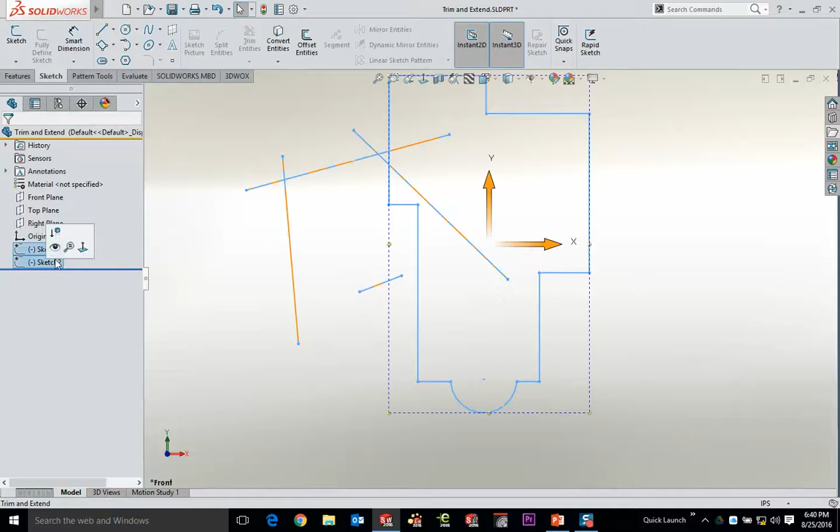I've got a different sketch over here that I wanted to show a little bit of as well. There's just a few lines that are kind of crossing in space.

The trim tool itself, when you click on trim and you're in this power trim, it's actually an extend tool also. There is a physical extend tool—if you click on that pull down menu, you will see extend as an option. But the trim works both ways.

So if you're in the trim tool, you can either click the little pieces you don't need and wipe across them—easy enough to do each of those—or if you pick on something and release, you'll notice it's actually attached to my cursor now, and whatever I hover up to, it's going to automatically extend to. Then I can just wipe across the edge. So it's a click and release, and click up to the part.

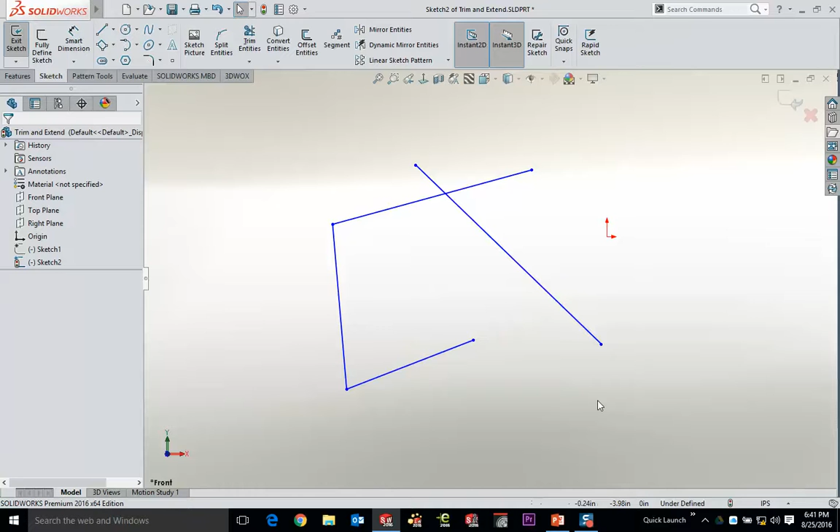Or if I want to undo that—undo a few things here—I'm going to trim it one more time. You can also pick and drag up to that part, and once you hover over it, you can let go and then pick and drag across it. So there's a few different ways to make this work.

Even if they don't touch, I'm going to pick this one here and drag it over to this one here. Look at that—it extends out into the middle of space where this one would be if you were to extend it. And then the same thing here.

Now all that said, if you're putting a sketch fillet on something, which is something I wasn't going to talk about, but this does everything together—if I pick 2 of these lines and click in there, it's going to automatically trim and extend those for us.

So it gets rid of all that extra data and throws a little radius on the end of it too. That's another way to deal with that. I'm not a big fan of sketch radiuses, but I like to put those in at the part level. Can't turn them off if they're part of the sketch. It's just as simple as that.

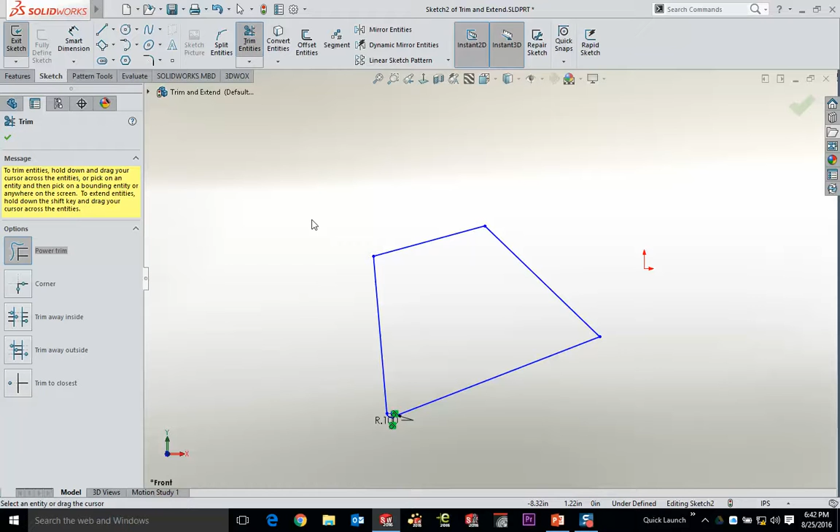In the trim tools, by wiping across the pieces you don't need, you can make yourself some pretty simple closed contours just with this wipe operation. Don't even bother with the other ones, because then you're picking things to trim in between. Now if it's the last entity, it is a delete. Simple as that. You end up with your last little arc here and then we have nothing to extrude. But that's how that tool functions. Simple trim and extend those around.

I'm going to come back to this one here in just a second. Okay, so I've got 18 more minutes. I'm going to cover the rest of this, and I'll get it out in quick enough time. Any questions so far?

Can you merge sketch lines? We were talking about this the other day, I think it was just an add-on with Autodesk. We were able to. So if I had a line here, and then I had another line like that, can I merge those? Touching, not touching? Oh, that too, that's fine. Yeah, if I pick that endpoint and hit delete, that's one line now.

Oh, that's cool. Okay, so even if it wasn't drawn that way, just picking that endpoint and deleting it works. If they're perpendicular or at any angle to each other, that doesn't work. Right, it's only if they're together. I'll pick that and hit delete, and then it yells at me. But if they are collinear, then it will just turn it into a single line. So pretty cool. I don't even know when they added that one, but it's one of those sleepers.

All right, I'll talk briefly about 3D sketching. This one gets a little bit deeper into things. Who's making weldments and piping and hosing? You guys do that a ton, a little bit here and there. 3D sketching is fun because you can draw without the constraint of a 2D sketch plane. There are ways to go in specific directions, but a lot of times this is made for making the stick work of a work cell, anything that's going to be built with weldment profiles. But also many times, if you're not using the routing or hosing applications, you can get away with just doing a 3D spline that's tangent properly to different entities and then doing a sweep operation to make those happen.

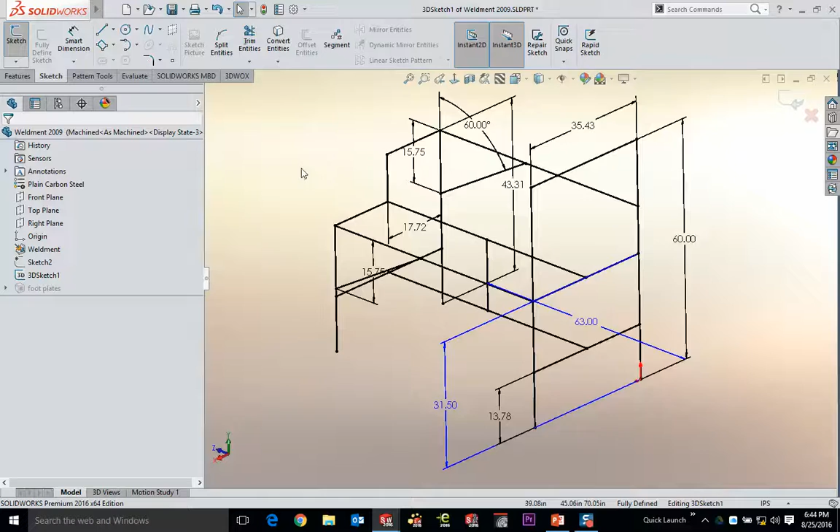So when you get into any of these kind of operations... let me get out of that one a sec. I'll bring up a couple of quickies on this one. This is a 3D sketch that was drawn at one time, and it's drawn in all kinds of X, Y, and Z orientations. To do something like that, you have your sketch tool that's up there, but it is a flyout as well, and underneath that, by default, you'll see 3D sketch as an option. Whenever you pick the 3D sketch tool, there will be fewer sketch entities because some of them just don't orient properly in 3D space, some do need a 2D plane. But lines, circles, splines, even arcs in 3D space are pretty cool.

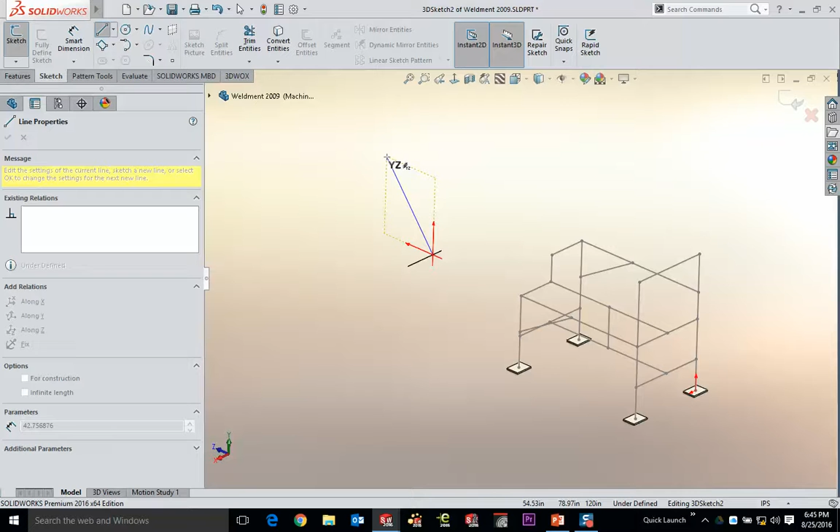When you grab your line tool, what you're going to see is something different. Right now we see Y, Z. We don't see a plane that we're sketching on because I never selected a plane. There is an origin down there, but I'm just going to pick in blind space and start from there. Now when I move my cursor, you can see there's a plane coming out towards us, which is the YZ plane. The tab key allows you to swap planes. Now I'm on my XZ plane. Tab again, now I'm on the flat plane. So now I can draw to the left if I want. I want to go up, so I'm going to hit tab so I can do one of the vertical planes. I'm going to go ahead and come out the screen towards us, so let me just hit tab a couple of times till I'm in that direction. And all I've done in this case now is I've drawn something that now moves in 3 different directions. So here you can see it's going up, down, out, and then back towards us. That's just a really basic example of what that's all about.

If I grab my spline tools and just start drawing splines in space, that spline happened to draw all on a flat plane because I never hit the tab key between points. But when you look at it and start grabbing the inflection points, you see the change in X, Y, and Z direction with this little delta box that shows up.

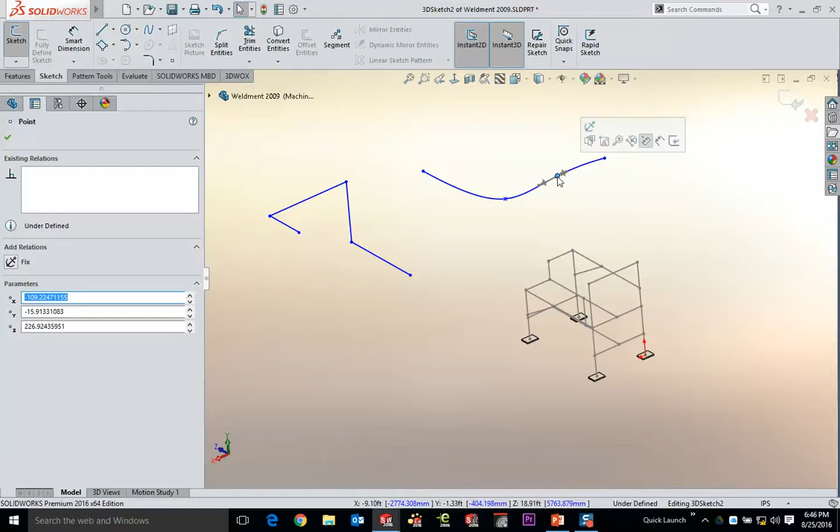The delta box is important because in the early days of CAD, if you dragged something in an isometric position like a half an inch, you might have dragged it 500 meters behind it because of the way those bounding boxes were. In this case, you could drag a point and add half a mile back to the back side, though we only do a kilometer in resolution, so that couldn't happen. But this is now a spline that's more serpentining in 3D space.

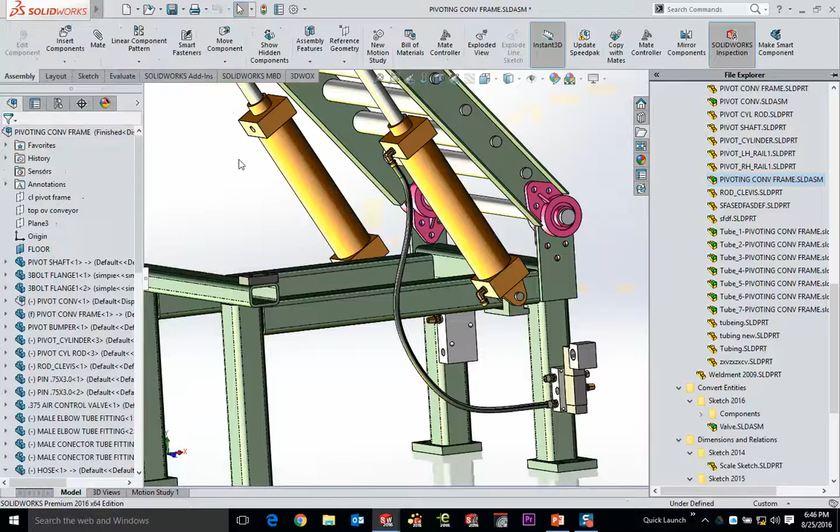One of the things I like to show with this is more of a top-down application for something like this. We end up with any type of hose you might want to create inside of an assembly, something like this particular situation here.

I've got a hose that I actually want to go ahead and modify, which I'm going to do right here—it's this little hose that we haven't yet created. Now I'm going to activate a couple of 3D sketch points, because by putting points into fittings, these are places that you can now snap to and select. Just makes life really simple with something like this.

Now I'm working in the assembly, so the position of these parts will also update the final product that we've got here. But in the end, I just want to go ahead and do a 3D sketch in a part that I'm editing within the assembly.

By using the spline tools, I can select the center of a fitting and some of these points that I have placed here—that just gives my spline orientation. If I click a couple of points here and then finish it in the center, those little click points on those center lines just allow me to put that in a more predictable position.

Now you see that my twist over here is pretty bad, but that's where I can go ahead and grab that point and drag it around on screen to get it a little bit more centered. Or if you want to, you can discreetly use some of the inputs over here on the side, and they do work. They're not going to give you great results, but that'll allow you to at least fine-tune this if you don't want to put a dimension on it.

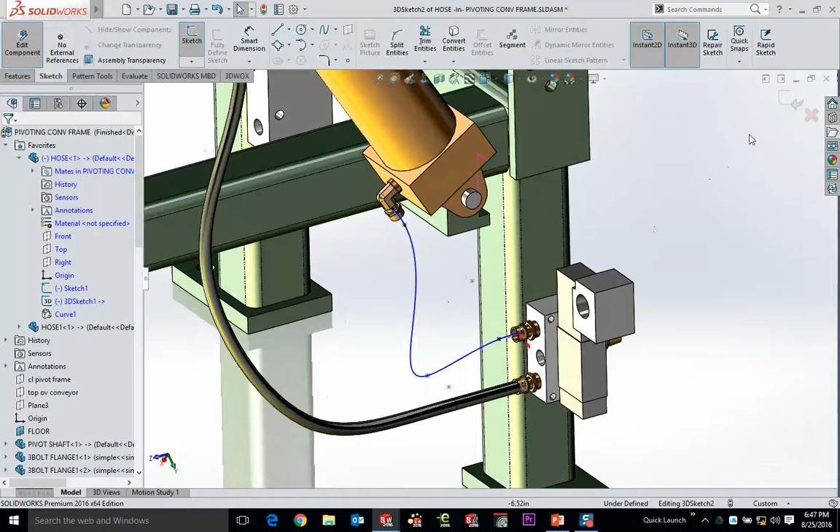But once we have that hose in place, it's really just a matter now in 3D space of running a sweep—so there's my path. I can either use a sketch profile if I want to, or SOLIDWORKS 2016 allows me to skip the profile step and just say it's circular. That means you don't have to have a plane and another sketch and a circle at a perpendicular angle—all of that stuff goes away.

That's going to create a hose that's going to sit in this position. Again, the beauty of this is if I ever take this assembly and move it—this isn't dynamic because a rebuild does take place—but once you move that and rebuild, everything kind of jumps into the right spot.

Fixed length splines are something you can do in some of the newer releases, or in the routing or hosing applications. But that's a reason to not have to be stuck on a 2D plane in order to go ahead and create something—hoses being the poster child for that kind of thing.

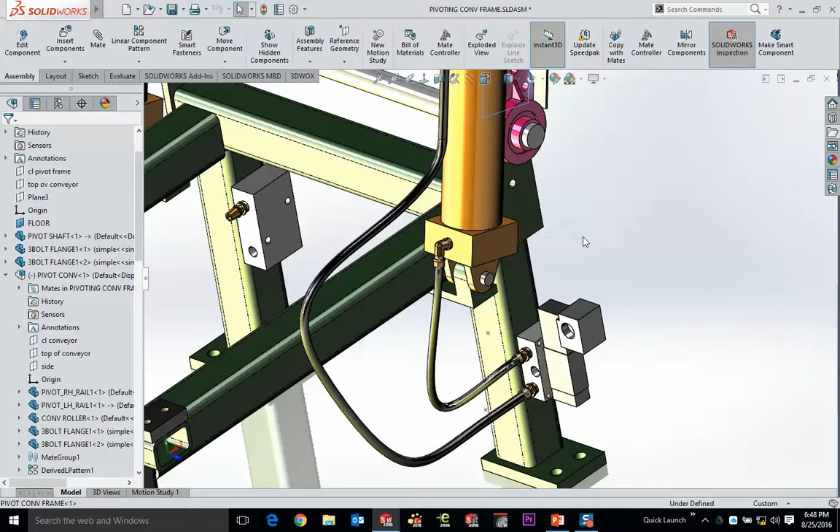I've heard more and more excuses as to why we can't do hoses, because the data, the number of points, crashes everything because of how complex these curves are, especially when you sweep them. Is that accurate, or can you dumb them down so they don't kill your model?

Well, a sweep is one of the more compute-intense things we do. There's two really compute-intense features: one's called a loft, which is blending dissimilar shapes, the other is the sweep operation. Now, a sweep along a path like this shouldn't be devastating. A spring or a helicoil hose, something with a lot of turns to it, that's a lot more triangles than something like this. But the more organic the shape, the more triangles it's going to be—that's sort of where it goes.

For what you guys are doing here, do you think hoses are overkill? They can be.

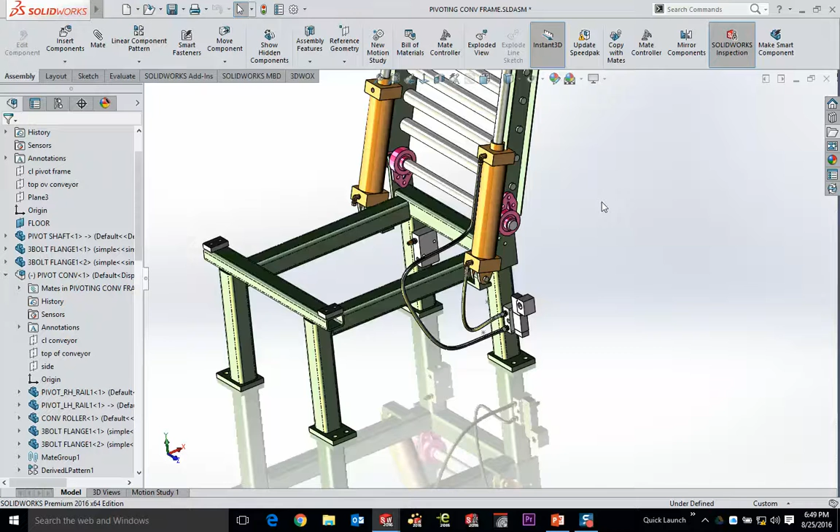It's one of those, is it necessary? Are people saying that because they don't want to do it, or they just want the guys assembling to have to deal with it, or is it more trouble than it's worth up front to do it out on the shop floor?

There's a few reasons for that. I can't always tell. I'd like to be able to put them in and then turn it into one entity without all the geometry, so that we can tell the guys in the back where to put it, so it would get made consistently. That's why I like them to be there. Nobody does that, and it's left up to them, and 3 different builders build it differently. And you go out to service things in the field, and you end up with retrofitting things you can't predict.

Moves that carriage there, that makes a different hose though, right? It's rebuilding the hose. These two are from an old data set. That's different, it's not working like an actual part. Correct, the last few releases - this is an old hose, from 1998. And then we didn't have fixed length splines. We only had it in our routing application even after that. As of a couple releases ago, though, you can do a fixed length spline.

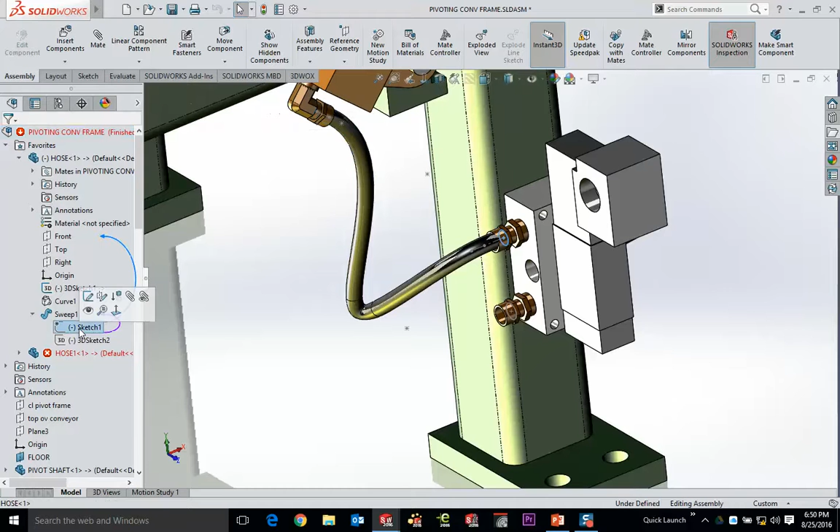In other words, if I take this particular part and I've got my path that's here, which in this case is going to be my sweep underneath my hose, what I can do is add a dimension to this. So regular dimension tool, pick the spline itself, and what that actually gives you is an end-to-end length of that hose. So if I call this one 15, you see how my slack was taken up a little bit right there?

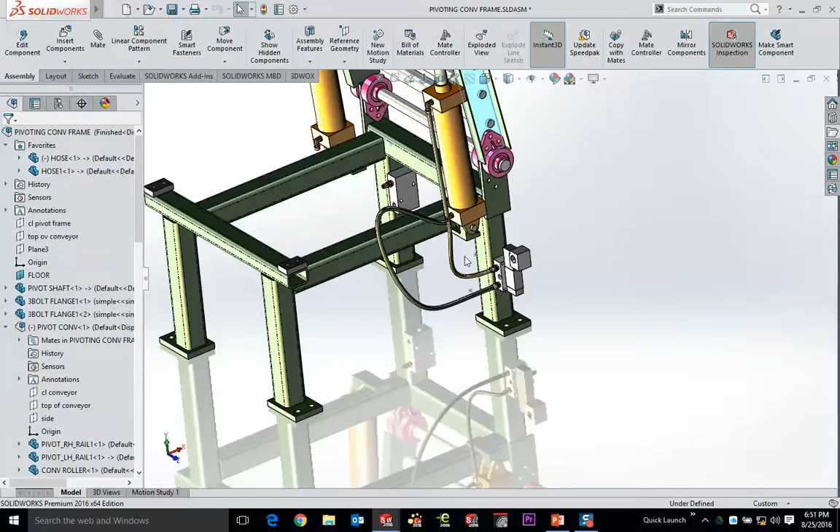What will happen now is that if that spline is dimensioned and I start to move this part, that part's going to move a lot more down there because it's got to take up the slack of that particular feature. So this one here is getting shorter and longer depending on the position of things, where the previous hose is not - you should see this kind of slack down a little bit more. Now it's staying 15 inches instead of being closest distance to a point or just sweeping the changes. This first hose here is not set to that, that's why it's kind of arbitrarily picking a place to rebuild. But yeah, that's a pretty old data set for that one.

I'm going to pick and choose a couple of these here just so we can get through the rest of this. But Loop Select is one that I absolutely love to show here. It's one of those things where it really rolls nicely in the event of a change. I'm going to illustrate this by using one of my favorite little data sets that I've got from top-down modeling that we like to do. Top-down is referencing parts, but it just has a great effect in this situation.

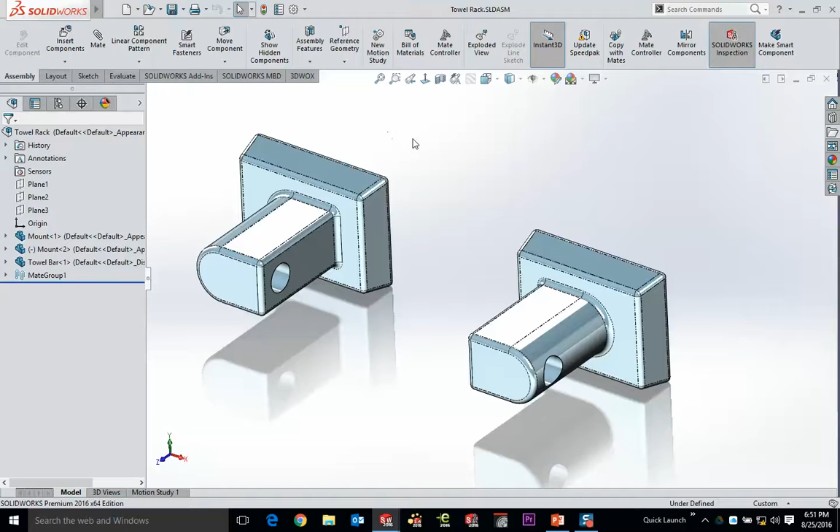What I'm going to do here is build a towel bar that goes between these two parts. I've already got the part started - it's empty. But I'm going to start by sketching the part on this face. So here we're going to go ahead and put in a new sketch. Now I'm going to roll this off to the side here. A lot of times what happens when you want to create an inter-part relationship is you'll pick the edge and hit convert entities or offset entities, which I'm going to do on this one.

What if I did that right now? Well, I've selected a discrete edge. I've picked an edge and I've said offset. So now what we have is a feature created from one selected edge. What I like to do is pick the face and then control select this edge. I'm not actually selecting the edge now, I'm selecting the loop.

And the loop is whatever the internal cutout is. Now I'm going to do this and say offset. We'll do this just so that we can create a towel bar that's a little smaller than what we've got here. Now, like a converted edge, this one shows as a black fully defined entity because it's offset a distance, but it's referencing existing geometry.

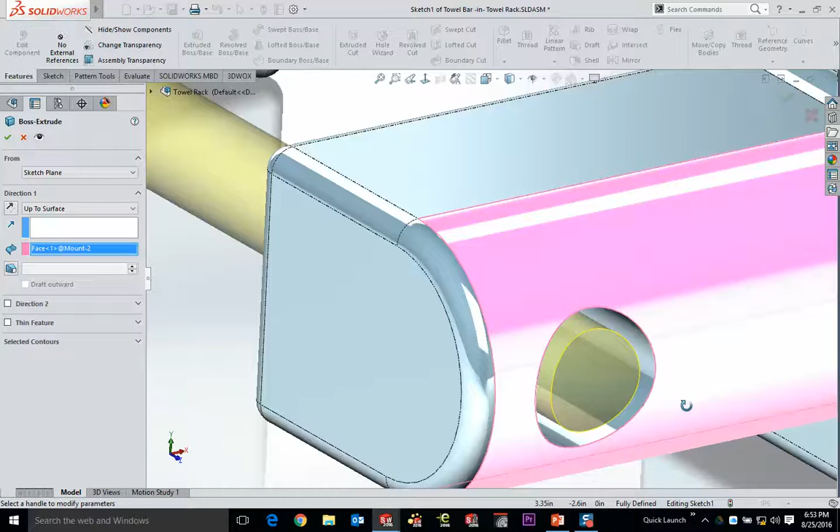Now the end conditions, and this is again top-down type design, is I don't just say arbitrary distance blind. What I like to do is things like up to or offset from surfaces. And when you do an up to surface and pick a face, it will go up to that topology and it will map that shape. So importing a headliner to a car, we can make the tooling, jigs, or fixtures for something like that.

Now I can also go multiple directions. So we'll say direction 2, also up to a surface, and in this case a different surface in that direction. But in the end, what this is doing for me is it's creating an inter-part relationship.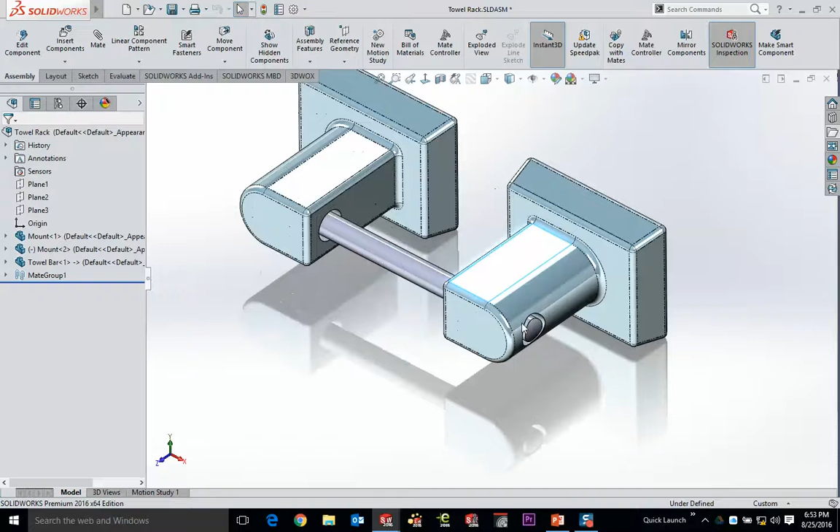Now if we want to change the distance of this and maybe do paper towels instead of toilet paper, what happens is the end condition updates because the extrude is up to surface. So wherever that part sits, the end condition of the extrude changes. That's the first part of this.

What really happens, though, is in the event of a drastic change to this particular piece. And I want to go ahead and tile my windows here so you can see this happen side by side. So over here, what's going to happen is I'm going to modify this particular shape. I'm going to hit it and say Edit Sketch.

Now, something very drastic here. I'm not just going to edit the sketch. I'm going to delete the circle that we initially used for that and actually draw something completely different. And this is just to emphasize a point. Whenever you delete something, I've now deleted a reference. If I picked that edge and hit Convert Entities, that reference is now broken.

But by picking the face and then Control picking the inside edge, what I'm defaulting it to is whatever this loop is. Now watch when I click back over in this window. See the towel bar updated? It's even 5-sided now, it is a hex now. So if I edit that sketch, you'll see it's actually a 5-sided offset entities, not just a circle offset entities.

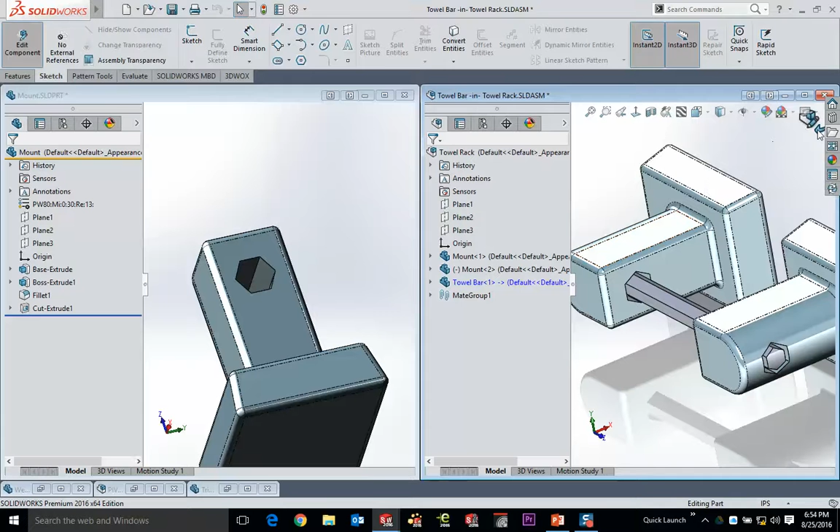So 6-sided. Thanks, Andrew. That's why we got you here. Sorry, 5-sided plus the original. Now, whatever, but that's the relationship that you end up getting, is the loop versus the edges.

Now an example I typically show of that is a little bit more of a discrete situation, which is adding fillets to something. If I fillet these edges and I physically come in here and pick fillet and grab those edges, well, what happens is when we get a full change to this feature, what we now get is broken edges. So even in this case, if we add some 0.5-inch fillets on that, now we've got 4 picked edges.

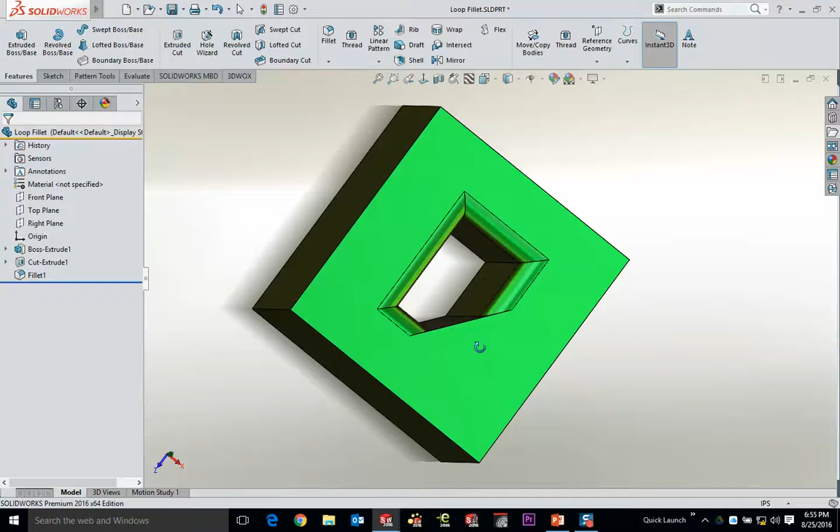So when I come in here and edit this sketch and make it something else, doesn't matter what it is, but if I hack off an edge here and then go ahead and trim this up a little bit, what I've now got is a fillet that's only going to be on those original discretely selected edges.

So what we want to do in a fillet like this is instead, we want to pick on the fillet, and I'm going to pick the face and that inside edge. Now what happens with that is we get it defaulting to that inside loop. See, even the outside edge didn't get selected there. I picked the face and the inside edge, and now only the inside loop gets filleted.

And what happens with that now is if we go back and edit this particular sketch, and I'll emphasize the point here just by adding a couple of additional spots on this side, trim these guys all off. Now when I hit rebuild, the fillet takes it all.

Okay, so that is defaulting to the inside loop, first of all, by picking a face and one inside edge, and that'll make it a loop. But it also makes sure that no matter what the inside loop is as a cut, it will always have all of those edges taken into account with the fillet. So it's a neat looking thing, and even if we edit that fillet, you see the input here is called loop, not edge or face or anything else. It is just whatever that internal loop happens to be.

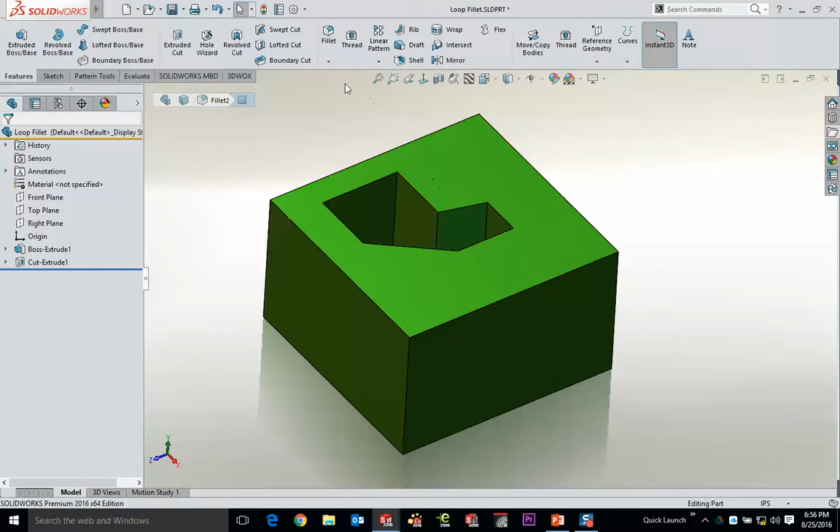Does it work the same way if you right-click on the internal edge and say select loop, or do you have to do face and edge? That's a really interesting question. Right-click there, select internal loop. Not quite, because it's only what's adjacent to that particular face. Probably would work on this one though. Right-click it—it's one of those mantras we always said: if you ever have a question or want to change something, just right-click it, chances are it's probably there. It's one of those habit things; I wasn't even aware that was on that right-click menu because I do it a different way.

Split entities—why would you split entities? We'll start to ramp up the speed here a little bit. Split entities is something you do so that you get more predictable results. If I have a semicircle and a rectangle and I want to loft those, what can happen is because they have dissimilar vertices, they will loft, but not predictably.

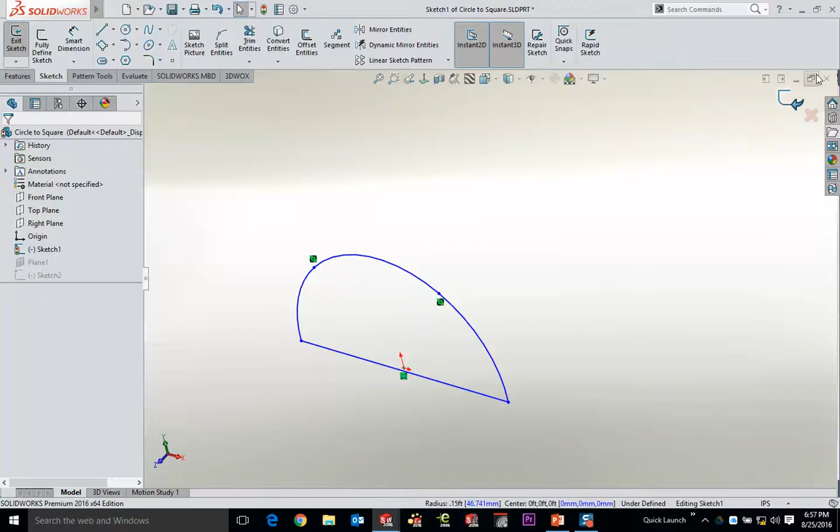So what happens with something like this is you want to take this particular sketch, and instead of it being a line and an arc, we can use split entities. Anytime you click on something, when it's a line, it will make them multiple collinear lines. When it's an arc, it will make that into multiple arc sections, but they're all co-radial to each other. That keeps the same geometry relatively, but gives you more vertices, so now when I loft a 4-vertex feature to a 4-vertex feature, I have full control over exactly how those faces are going to blend. That gives us much more predictable results for those cases. Not always what you need, but that would be a reason to use split entities.

So offset entities, that's just what we did there. We took a sketch and offset that particular feature, so we can blow past that just a little bit. But it's a great way to create an inter-feature relationship without having to re-sketch anything. 2016 allows us to pick on the dimension and actually flip that offset from the inside to the outside without deleting or re-sketching things.

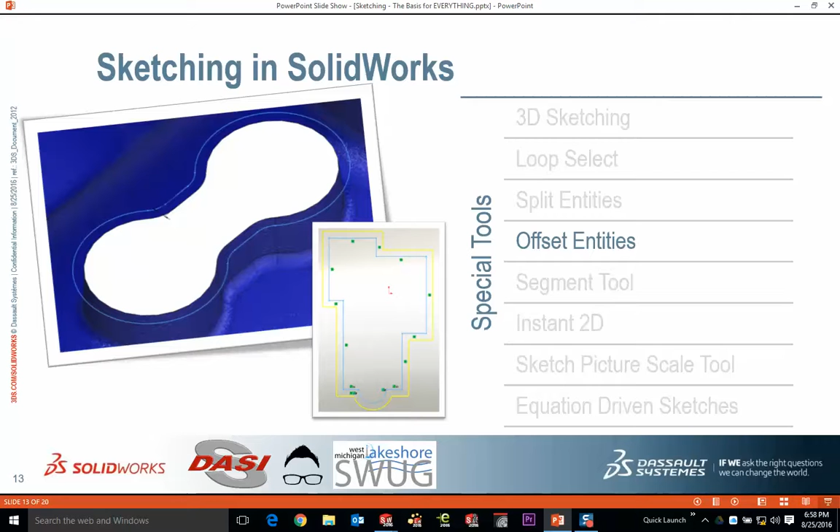The segment tool is something we added in 2015 and have updated more in 2016. I use it all the time when I'm using the hole wizard, and that's probably the best place for it. The segment tool allows you to chop a sketch entity up, much like split entities, but it lets you chop it up into equal-sized bites. So anything we happen to be doing on something like that is going to automatically give us the spacing between each of those features.

So when I'm looking at a part like this one here, I'm going to draw a hole wizard hole on this end face. The magic we'll do on this one is I'll draw a circle like I showed before. I'm going to draw it, but I'll type in my dimensions now because input dimension on sketch creation is turned on. Then we'll just make that a construction line.

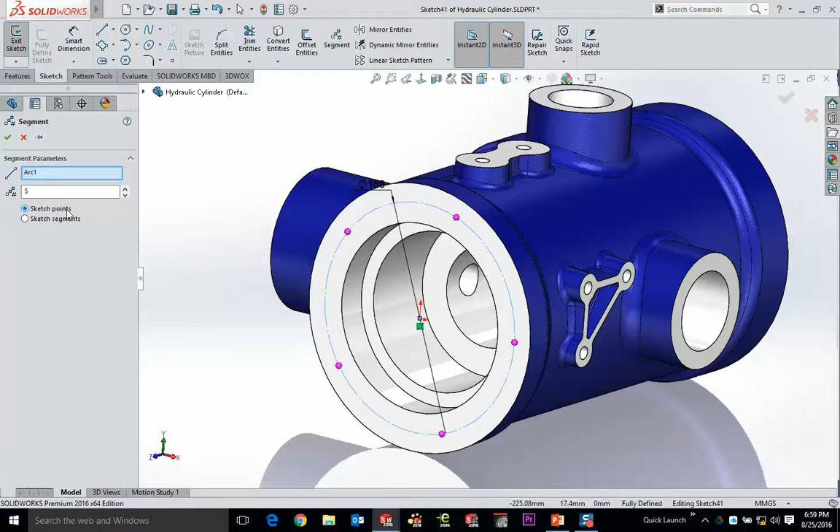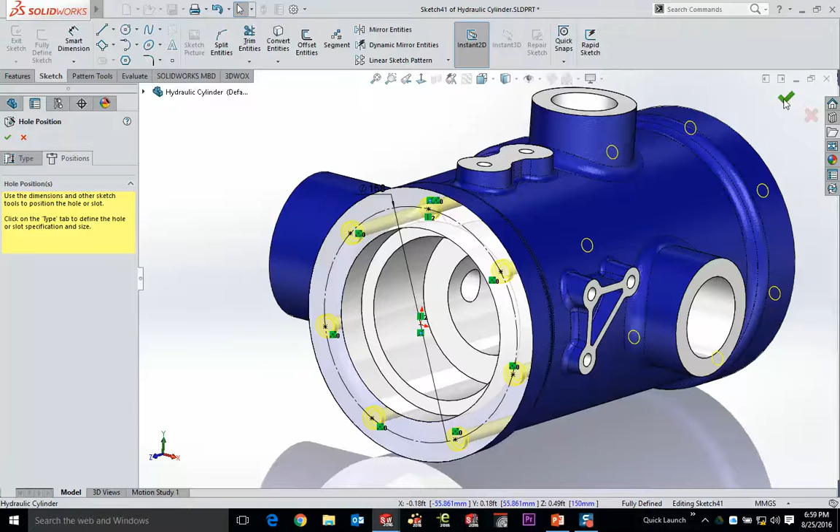The segment tool will take it and do two things. It will either allow us to pick an entity like a line or a circle and chop it up into equal sized sketch segments, which in this case would be co-radial arcs, or allow us to put sketch points coincident to that entity at equal spacing. So when I start to change this, you'll see we get 5 sketch points. 2016 made this smarter because now they not only have points, but a relationship called equidistant so that they maintain their spacing to each other. If you come in here at any point and start deleting these points, the remaining ones will respace because they're all still equidistant to each other. It's a really nifty way to do that. For the hole wizard it's perfect, because generally what you want is equal spaced holes around something. It'll put a bunch of points in there, and then the hole wizard will continue and finish up with the hole feature. So the segment tool is a pretty good one for those kinds of things.

Instant 2D I'll do rapidly right here because that's what it's all about—really quick ways to do things. When we're looking at a sketch like this one, what you end up with Instant 2D is quick editing. I'm going to turn off my relations for a second. Instead of double clicking, changing a dimension, and then exiting or rebuilding, now you just tap a dimension one time, and when you type in a value and hit enter or click off of it, it will update immediately.

What makes this even more powerful, and it works in 3D also, is when you click on that dimension, you also get handles that pop up, little grips. You can drag those around and it will dynamically update your feature. But you can also snap to the scale that pops up for an element of accuracy, so it's dynamic drag and drop, but I could drag it directly to 20 without very much effort. That's what Instant 2D is all about.

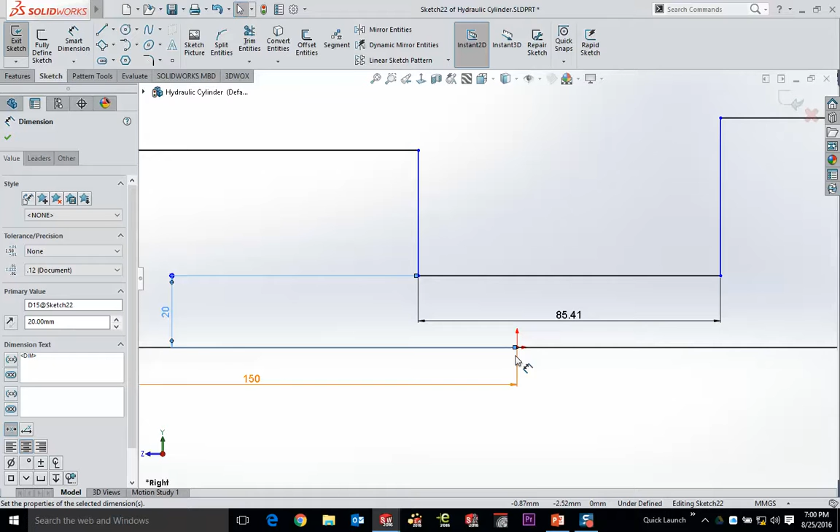When you click on a dimension that has open degrees of freedom in both directions, both endpoints will give you a handle. This one happens to be fixed to the origin, therefore I can't modify this side, I can only modify this side. But it allows us to drag those things around dynamically.

Sketch Picture Scale tool, we'll skip that one real quick. Equation-driven sketches, last thing I want to show you, and if I have time, I'll go back to that other one. Equation-driven sketches are interesting, and I'm just going to show you a final example. If you need this example file, I'd be glad to show it to you.

It's something where you physically draw in a curve based on more numerical inputs, so more arc, cosines, tangents, and the like. The feature I'm going to use is this surface that creates this neck, and I've created a spline here that's a 3D equation-driven spline. Now it looks like just a regular arc because of the numbers we're using, but when you go ahead and pick your spline tools, right there is your equation-driven curve, and that's how we got to this.

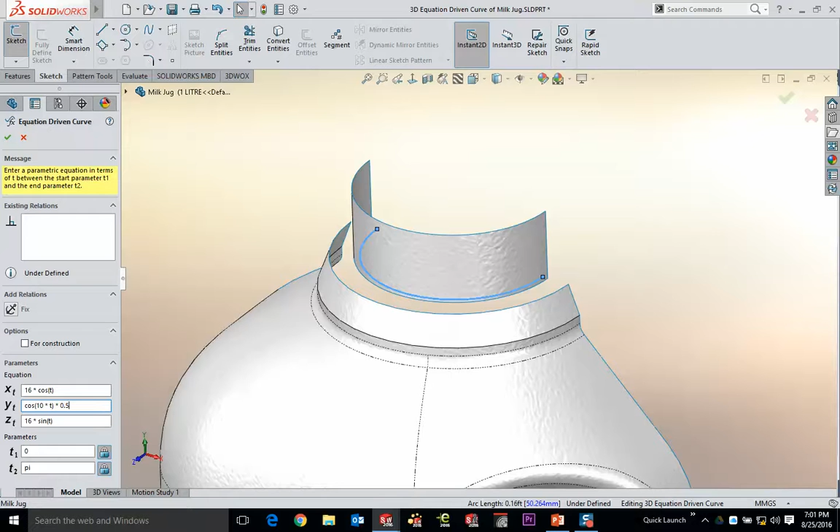When you pick on that spline, your property manager has different inputs, so down here is the equation. Now if I change the y input to this, and change this value here to 0.5, I'll zoom in a little bit more before I make this effect. When I hit this, you'll see it'll now turn that curve into a sine wave.

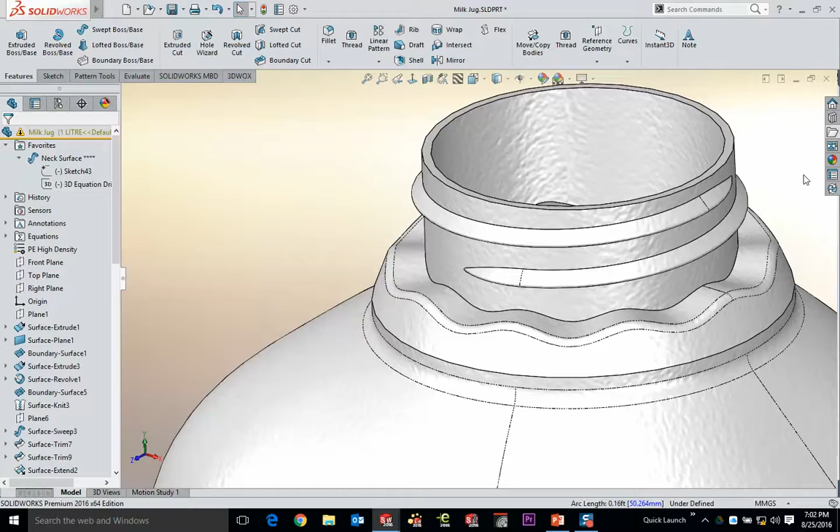As a result, this happens to be an extruded surface, and that surface is used to trim the rest of the part. So instead of the regular neck that we had on this milk jug, what we now end up with is a wavy neck on the milk jug. That's all by drawing a curve based on an equation as opposed to trying to draw in several features and maybe pattern them to make this effect. But that's just a surface extruded off of a feature.

I will go back and do the Sketch Picture Scale tool, and then I'm done. When you need to bring in a picture, that picture has to have some sort of reference. When you're in SolidWorks and you're editing a sketch, you can simply click Sketch Picture, and that'll make you navigate to wherever this thing happens to be. Let me just quickly get into this one, and we will open up this last feature.

The sketch picture on this one happens to be a PNG file with a little reference for a size. When I bring it in, this line down here is 6.5 inches, and this one up here is proverbial 6.5 inches on the sketch. So what happens is this line shows up, this blue line, and you position it on the picture.

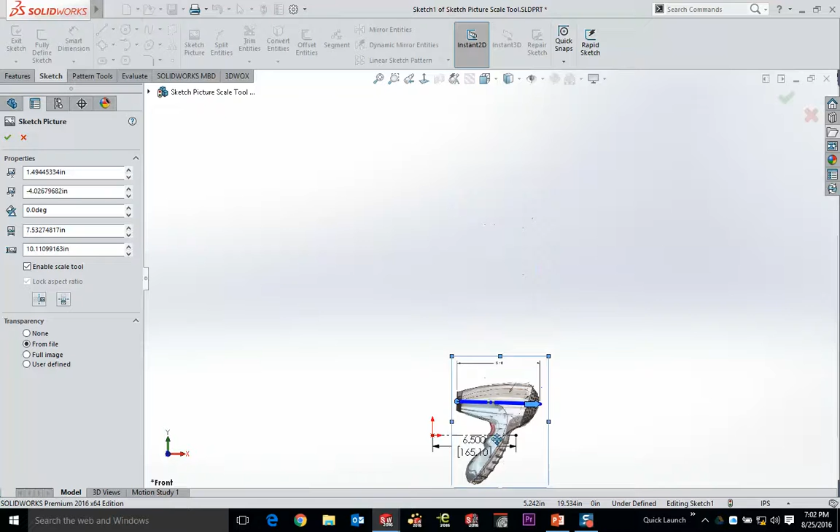I put this point here, I can put this point anywhere that I want it to be, say right down here. When I click it in place, it now prompts me for a dimension. Type in what that length represents, and it will then scale the picture down to that exact size, which I can now go ahead and position it where I want. I can even grab this endpoint and rotate it around if I want to. Now I've got a sketched picture that's identical to the size I actually need to sketch at. So if you've got some sort of known value inside that picture, it's a really simple way to go ahead and scale it to the proper size.

All right, so that's what we just went through in the last hour. Thanks for adding 15 minutes to this because I definitely need it.